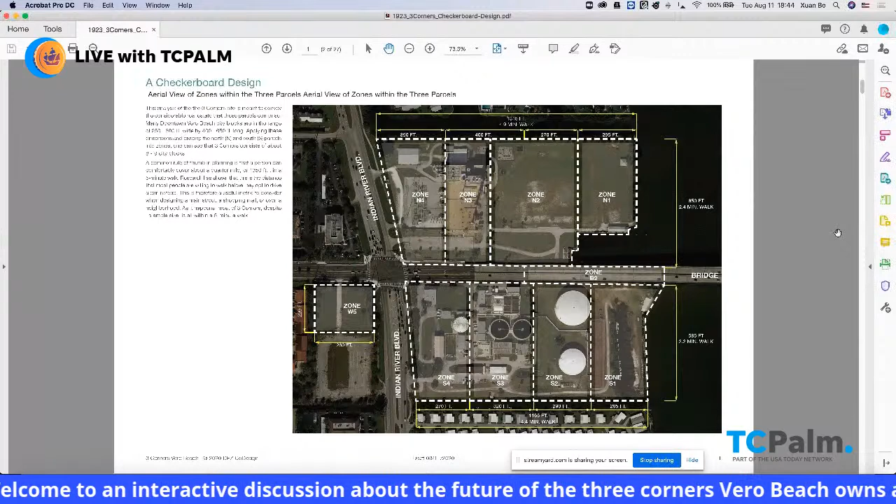But also, this has been seared into people's imagination. The culture will have changed, just like it did in the 1918 pandemic. Many things occurred in 1918, 1920, et cetera, like moving out to the suburbs -- it was the first time we actually moved out to the suburbs. Modernism, modern architecture with its very large glass windows, white color you could clean, and metal furniture without upholstery -- that was the result of the 1918 pandemic, and it's still with us, all this stuff is still with us. So I maintain, and you might disagree, that the changes are permanent, at least for a generation.

And so we have to design a whole new type of park, and we have to do it essentially without public funding. So you'll be seeing two of those plans today. Next -- okay, so this is the site with the existing buildings. You can see the north.

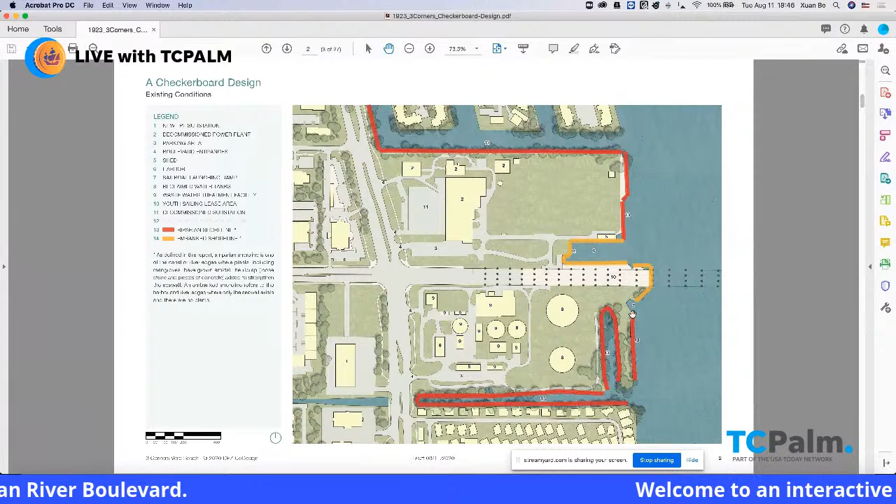Number 2 is the existing power plant, which has one beautiful hall, very tall with a beautiful ceiling, and a lot of utility stuff to the east that could be demolished along with these buildings. There's already a remediated site ready to be built to the east. To the south, in red, are existing mangroves, which we'd want to supplement, the two beautiful clean water tanks, and then stuff that can't be saved and will be gone in 5 years.

At this point here, you can cross underneath the bridge—not earlier, at this point—and there's a harbor, which is really quite interesting.

Now, there are a lot of little details and controversies that I'm not going to speak about today because in a way they've been solved. Everybody agrees where the sailing club is going to be, everybody agrees where the boardwalk is going to be. There's a lot of agreement. That's not what we're talking about.

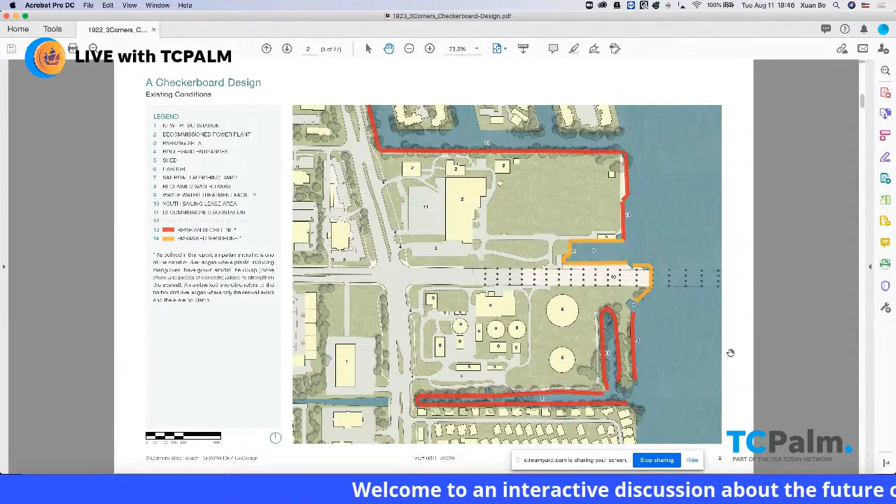Please consider that what we're facing today is 50, 60% agreement. Remember, this is a plan that had 100% agreement. Now we have a plan that, because of the new situation and because I've introduced new elements, probably has 60% agreement. I'm not going to talk about everything we agree about—I'm going to talk about the things that may be controversial, just to get on with your questions.

Okay, next. So this is the plan on which there was agreement. Starting on the east, first of all, over here, just 15, the site across the way—let's just say that's sold for a shopping center or an office building.

By the way, both of those industries, incidentally, are dead. There are going to be no more shopping centers for a long time and no more office buildings. So this has to be something else. Probably the only thing that would fit there in short order would be an apartment building. Office buildings are goners.

Now over here, in the least important part of the site, we put a parking lot. This—we saved the great hall, turbine hall, of the electric power plant, and we put this curved hotel with about 200 rooms on this side.

Although the entrance is over here, because that's the distance we have from the bridge, the hotel lobby is on this side, okay? And there are games here, the fields. Then we have this slight curve that takes you in like this, and we have open sheds that are very popular, and of course we've retained them.

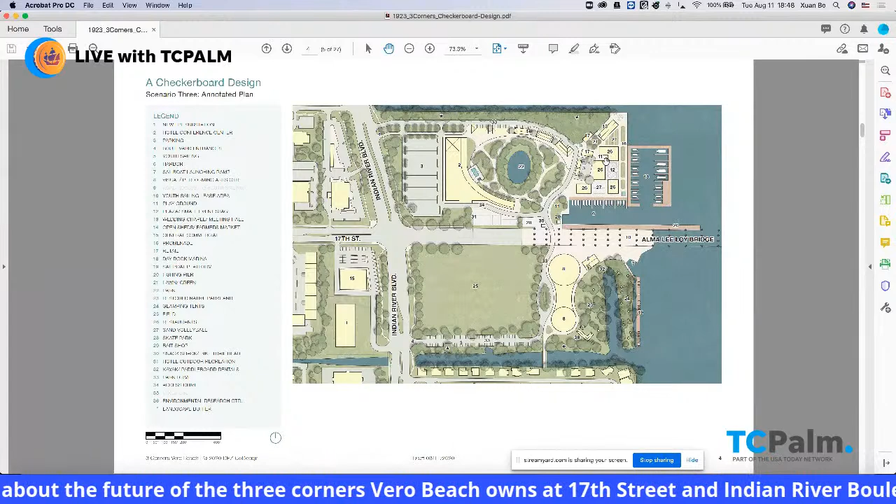And then over here we have a series of restaurants with different price points, usually 2, maybe 3 restaurants with different price points so that people with more or less income are welcome and feel comfortable.

And then we put here a hall, which we call a meeting room, but could also be a wedding chapel that would raise funds. Wedding chapels and so forth raise a lot of funds, but it could also be used for the meeting hall, for City Hall, just for public meetings. This is a nice place to meet.

A harbor for day boaters is built here, and to the south, at this point where there's a launching, is the sailing club. This is this canal, which is beautiful at the moment, could become more beautiful.

And we put some glamping tents on it—tents that you can actually camp in the woodlands. And then the two tanks are preserved, and an awning is put between them as a stage for music.

This we mothballed. This area we decided, and actually people agreed, but I have to say the decision to mothball this site, although made by the council, was proposed by me. We have to remember that was my proposal.

And the reason I made it is that we didn't have any ideas, you know? Insofar as it wasn't a positive thing where you say let us mothball it and have somebody else decide—we can't decide, so therefore let's mothball it. But in any case, it's 5 years before the sewer plant is moved out, okay? So I want to say mothballing is not a positive thing, it's just that we didn't have any ideas.

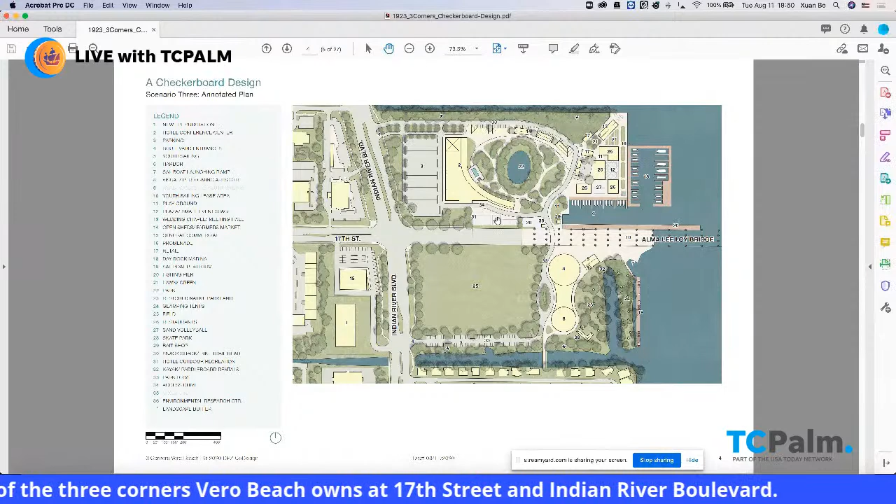Now, since that time, we have had ideas. And I would urge you to think of this as not a mothballing, because now we have ideas, which I'll show you shortly. This plan was the one I showed at the last meeting, and it was this, among others, but I think the whole process received that famous standing ovation.

Okay, so we moved on, and I proposed this to the steering committee. And when it was done and very popular, I said, I really owe you another plan. And so I did this one.

How is this plan different? This plan has a parking lot like before, and it has the conference center, number 2 here as before, and the lobby is on this side, like this.

But instead of a large hotel with an enormous internal walkway - and that large hotel, I'll tell you, I just spoke to a developer this morning, no one's going to be building a hotel for a very, very long time because the hotels are suspect. They're doing very, very badly. I spoke this morning to Stefan Johansson, who knows about such things, and he says forget about the hotel.

Actually, he added one more thing. He says, for that matter, forget about the conference center. But that's because they were thinking about conventional hotels with elevators and hallways and all that kind of thing, and these air-conditioned monsters, which are the conference center.

So when I redesigned this, it was different. This conference center, which is this beautiful thin hall, would be cross-ventilated. So that's an entirely different proposition, and it can be handled. I have lived many times in Florida with cross ventilation with just a little bit of supplement. So this is a different conference center.

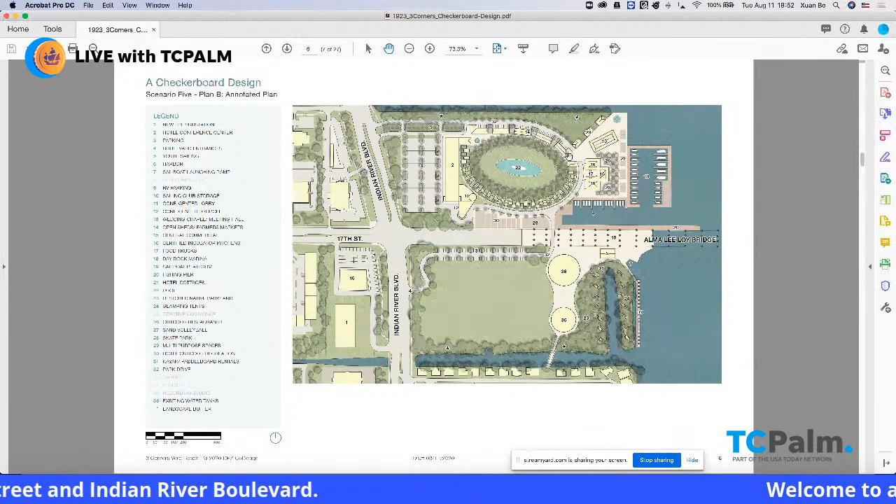Just imagine they're multi-use. They can be used for anything from a cat cafe to selling vegetables, to basically having outdoor classes for the kids and so forth.

But here, instead of an ecological pool, what I did is I put a real swimming pool. There are lots and lots of kids on the west side of Vero that don't have a pool. They don't belong to a country club. It's difficult - they certainly don't have a pool at home, and they certainly don't have much of a chance to get to the beach.

So we said if we really want to make this a place for everyone, let's have an incredibly magnificent pool, huge and fun and surrounded by an open lawn so that people could actually sun themselves and sit very far apart. This is not a tight pool. You can distance yourself within the pool, and there are lots and lots of places to actually sit and sun yourself.

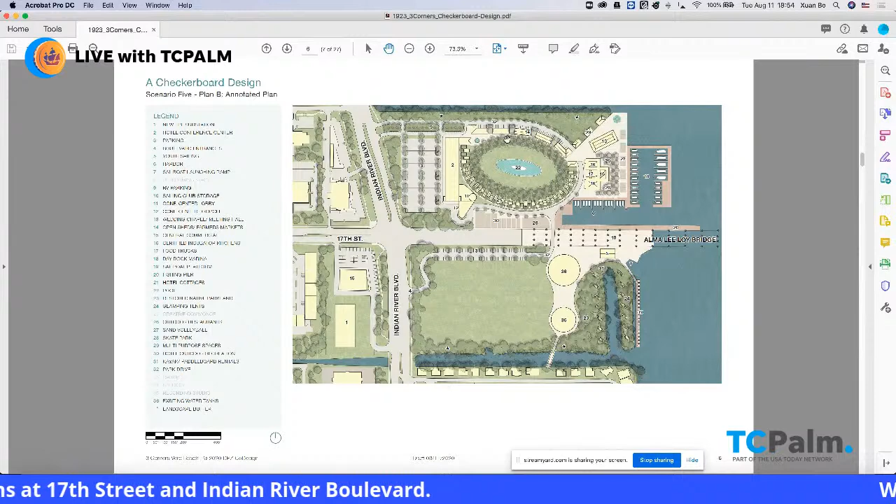And then here you can see this ring of trees, which are palm trees and shade trees. Those are spaced at 20-foot centers, which means you could bring a blanket and spend the day out there with automatic spacing, social distancing, because the trees make you social distance. So that's what you're seeing here, and that's quite an innovation.

Now over here we have the three restaurants. Instead of being air conditioned like the ones downtown, they are actually open air sheds. I wanted to make them less expensive and more variable. So you see how they work here - these are food trucks, fed by food trucks, very inexpensive to build. And as long as you cater and manage the food trucks, you can continually have fantastic food, expensive or less expensive, and it changes every weekend if you wish.

So this is less expensive, and in front, most of the seating is outside. These are trees and palms with 10-foot spacing, which is exactly the spacing for a table with an umbrella.

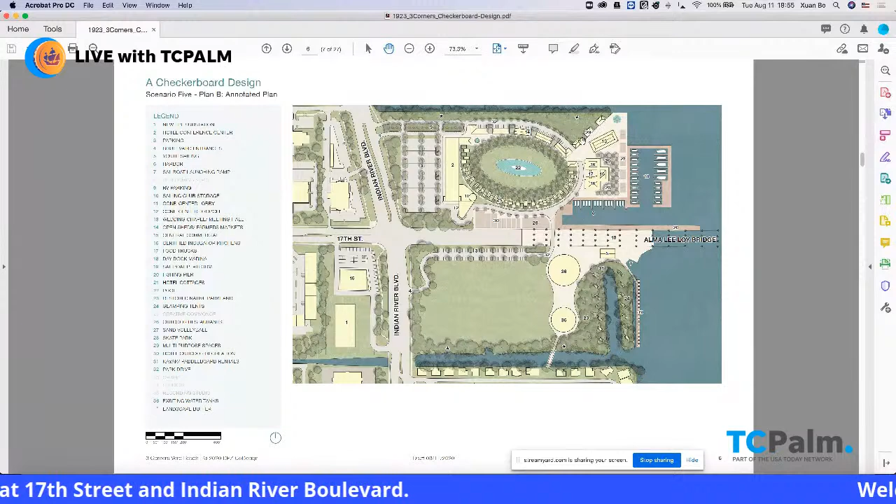And then you have the old meeting hall that was always popular, or chapel, wedding chapel - three air-conditioned spaces here, because you have to administer the chapel. There's reason to have them like little offices, probably administrative for the whole thing. And then these are sand volleyball courts, incredibly popular. And on this side, as you know, we have actually mothballed this side.

Okay, so this was the plan, and this was approved. And then we received a couple of pieces of feedback.

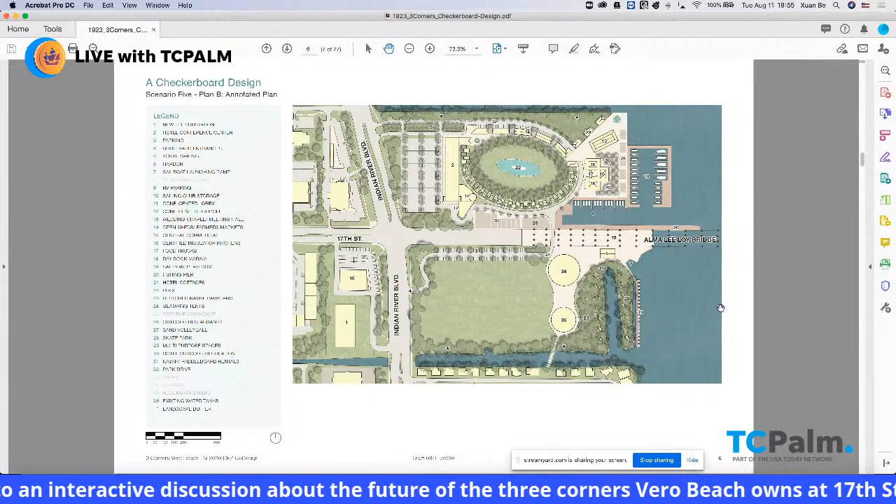Do you have the big hotel? No. Okay, this is, no, there's one which has the big thing here. Wait, there's another one I have to show you, the one that has the arts column. Sorry, we've been doing our best here. Jeez. Unbelievable. Is that the one with the arts column? No, the one with the oval.

Okay, so this is the idea we had over here. We said, okay, let's put the canvas between the two structures. And by the way, these two tanks are beautiful concrete, beautiful tanks. You can actually have galleries inside, you can project art on the outside, and you can have a canvas roof between that makes a wonderful stage.

Okay, so then we made a place where you can listen to music, and this is a 10-foot grid on the grass, like a football field, so you're separated, your little group is separated. And above it, there's also a grid of wires with local speakers, so instead of the band actually blaring out and bothering the neighbors, you have a speaker above you so that it's very loud from where you sit, but not loud anywhere else.

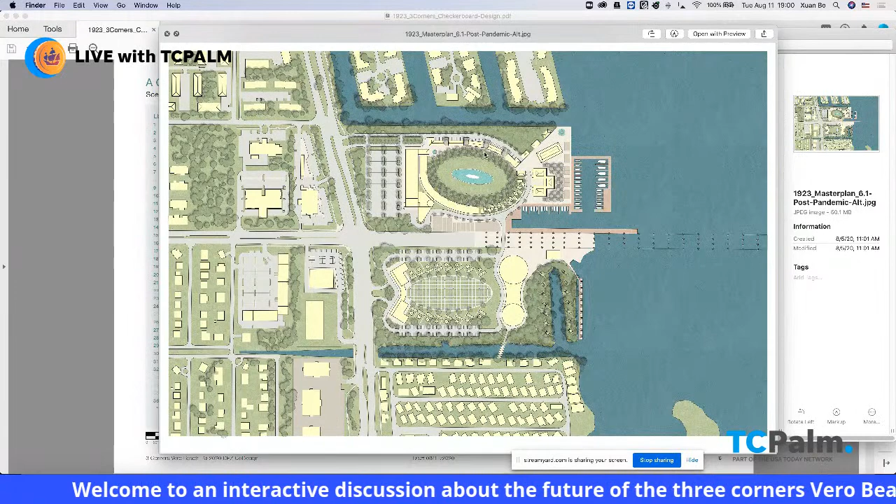Who's going to build the roads? Who's going to build the playing fields? The courts? Who's going to build the pool? Who's going to plant all that landscaping? In my opinion, that's between $5 and $7 million minimum. And I was counting on the 20 million that was actually the income from the sale of the utility when it happened.

I was told, no, times are different. COVID has eviscerated us, and we can't pay for that. And I said, how can you tell me this? How can you tell me? And he said, well, that's the way it is. We need the 21 million in a lockbox too.

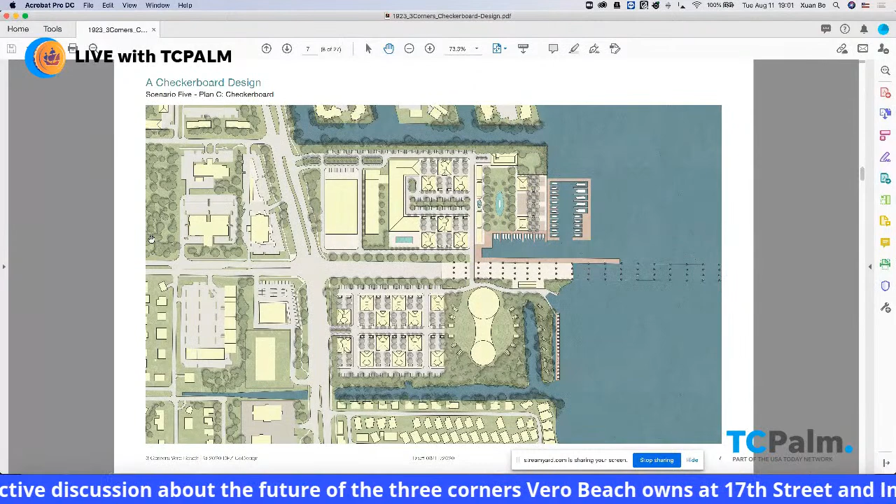So I said, okay, Monte, I will then do a plan that actually carries itself. In the last couple of days, after Monte's conversation, I came up with this plan. Now, this plan works this way, okay? And this creates a lot of income.

There is, of course, the conference center that needs to be renovated. There's a hotel, an inside hotel, a conventional hotel of over 200 rooms, with its own pool.

And over on this side is a facility that will pay $6 million, which is a boat barn. Again, the boat barn is no taller than the existing power plant, nor is it any uglier. In fact, it can be quite nicer.

The boats come out here and they would launch here, right here using this harbor without bothering any of the neighbors on either side. So this is a big hit of income, not only at the beginning, but also ongoing. This can generate a gross of about $1.1 million in a year.

Then we put a kind of small Key West style apartment building here with lots of treed courts. Each of these has 12 apartments that walk up, over here. These over here, all these apartments are 216 apartments. Again, they're walk-up buildings, they're very small, they're the size of houses.

And that will generate, a developer will pay for the right to build those, $6 million. Again, $6 million is plenty enough to get everything built. To get the chapel built, to get the restaurants built, to get the pool built, these are the open pavilions right here, to build this, to build the docks, to build the playing fields, etc.

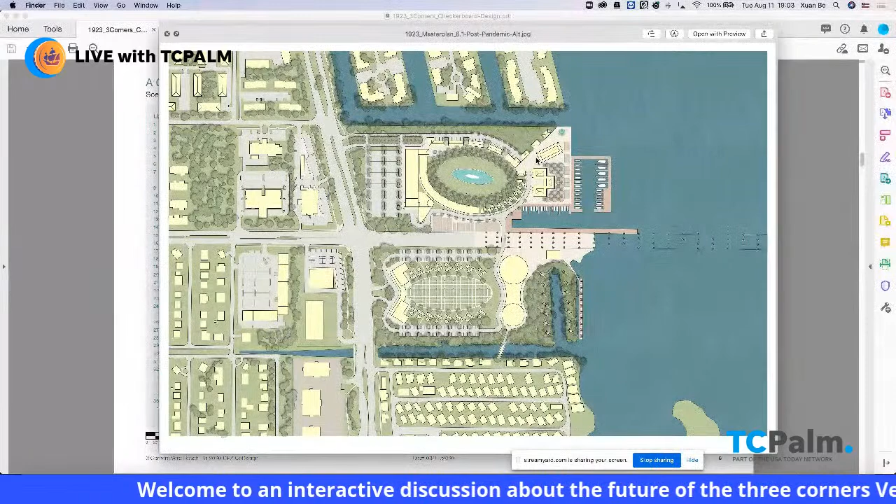The city has to pay $5 to $7 million to get it off the ground. And you can actually kick and complain that somehow, but it ain't gonna happen. So let's just confront the reality.

Now, if you want to have a plan that generates income from day one, it's not going to be the hotel, it's not going to be the conference center. What's going to generate income from day one is the boat barn, which will generate a great deal of income. This will come later when it's revived, when the industry of conference center and hotel is revived.

But these apartments will generate another immediate hit of 6 million and ongoing income, which, if you negotiate properly, will be a continual operating income, a very, very luxurious operating income to keep the arts going and to keep all these facilities highly funded forever.

So I just want to back off and say, I've done my job. You either have money and you subsidize it, or you do this plan. And if you say, well, we don't want apartments, we don't want this, we don't want that, that's fine with me. We can do the other plan, but it's not my fault if this thing doesn't get built. So I know I've laid a very difficult problem in front of you, both politically, but there is a fiscal solution.

By the way, I'm not going to show you renderings. These are all very nice plans. Could you show them, please? I mean, all of them are wonderful.

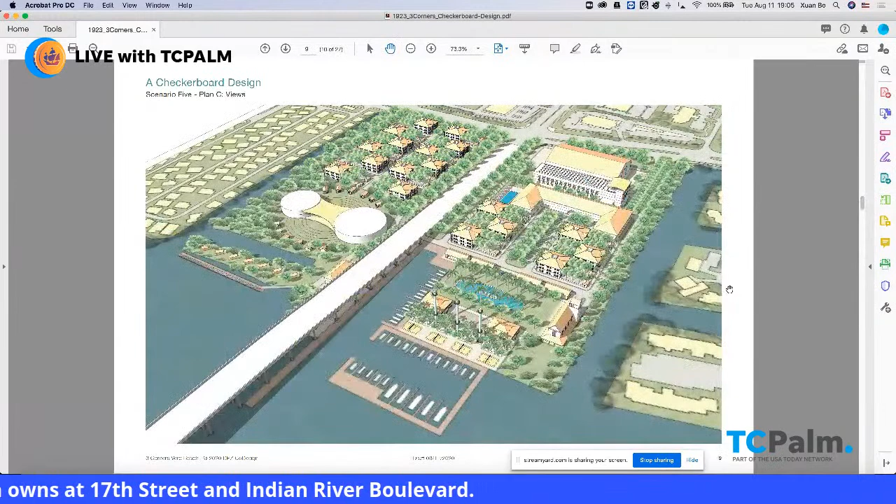So this is the plan, here's the boat barn. As I said, perhaps not expected, but it's not uglier than the power plant. This is the power plant, which is now a beautiful conference hall inside, with a much less expensive tent on top.

That's going to be the rooftop bar. Here's the hotel, 240 rooms or so, with a nice entrance. You come in like that, and you have this magnificent turnaround, like the great hotels of Florida. And then you have apartment buildings here. Each of these is 12 apartments. They're walk-ups, I'll show you what they look like.

And then here are the open markets, very well located. By the way, everything's more compressed now. Theoretically, it could work a lot better.

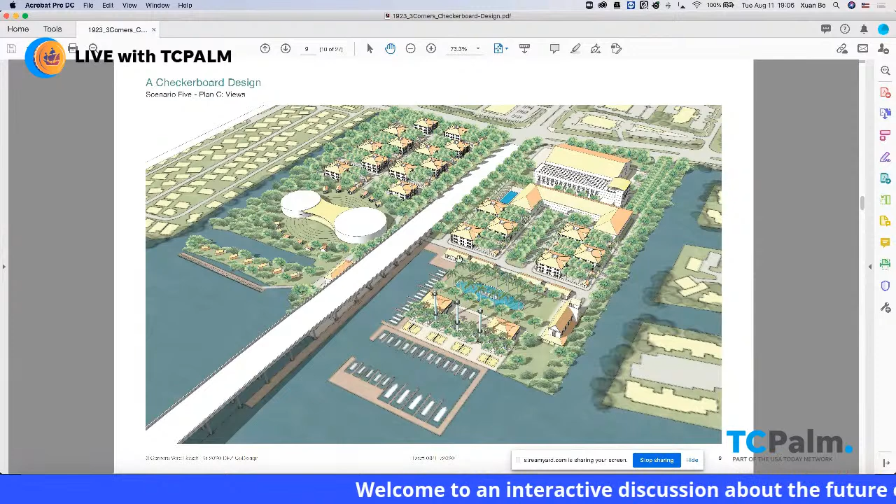Okay, this is the restoration of the mangroves that makes a park-like facility here, a bit of a wilderness. The kids are here now, playing and splashing, with inexpensive food and excitement out of the cabins, out of the market buildings. Then the 2 restaurants, which may in this case be air conditioned if you wish.

And we were asked to preserve the 3 great chimneys that actually from the ocean, and from the approach anywhere, these 3 great chimneys, they're actually very handsome. And so we took them off the top of the building, because actually they don't sit on this building, they sit on the ugly part that we demolished. So we took them down and we kept them as a signal, and they're really beautiful.

And they will actually shine the lights everywhere. They will light the landscaping, they will light the pool, they will light the courts. There's nothing better than distant lighting instead of low lighting. Low lighting destroys your retina. Very tall lighting, high up, is like moonlight. You can see everything, but it's very gentle.

And here's... Bo has to put in much more trees here. This is a wooded forest. By the way, we did this today.

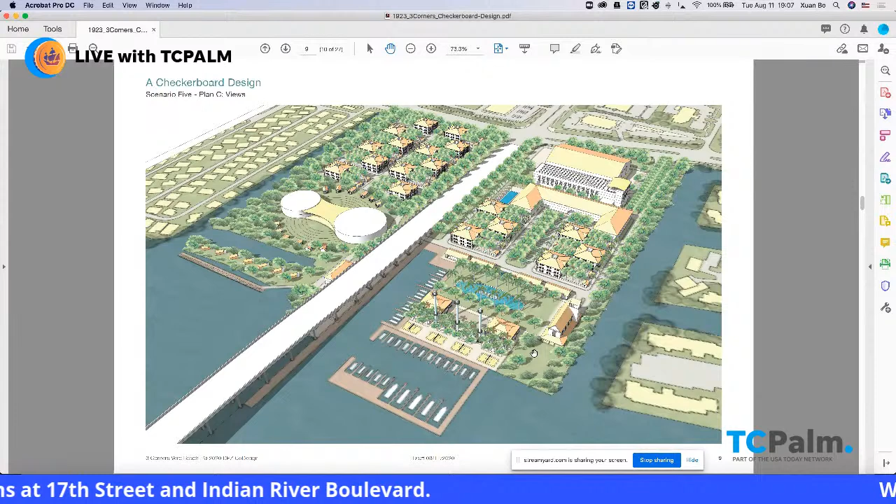And over here, you can see the canvas stretched between the 2 tanks. And these tanks are fantastic because they're inside art galleries, and outside you can project inside. This stretched canvas is a stage that actually will play music to both sides. And then you have these little apartment buildings with their forecourts. Okay, and the glamping here on the canal.

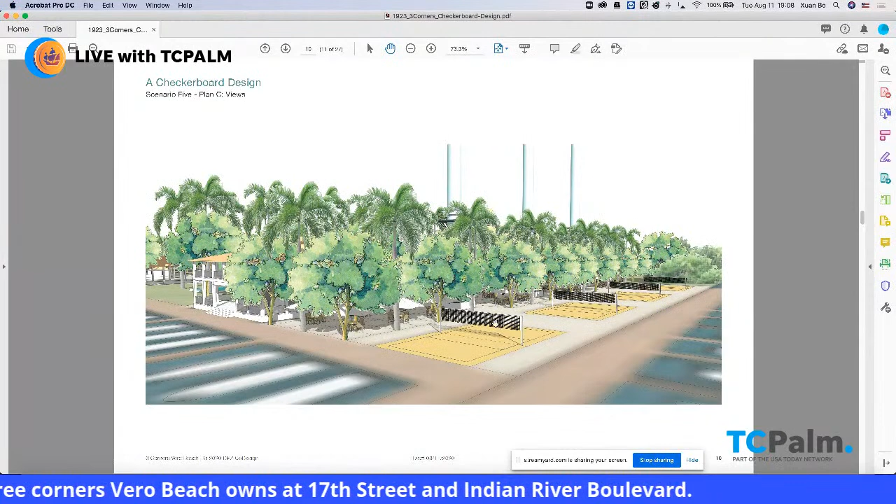Show me more, this is from the ground. These are the courts, the sand volleyball courts. And you can see here the 10-foot grid of shade trees, palms, that actually automatically spaces people. And here you see the restaurants behind it. And this is the beginning, we haven't yet done it, but these are the 3 chimneys.

Next, and here it is, here's the pool, which would be absolutely delightful. And again, a huge pool with very much children in mind. Okay, this isn't for swimmers, this is for the kids of Vero to have a great time.

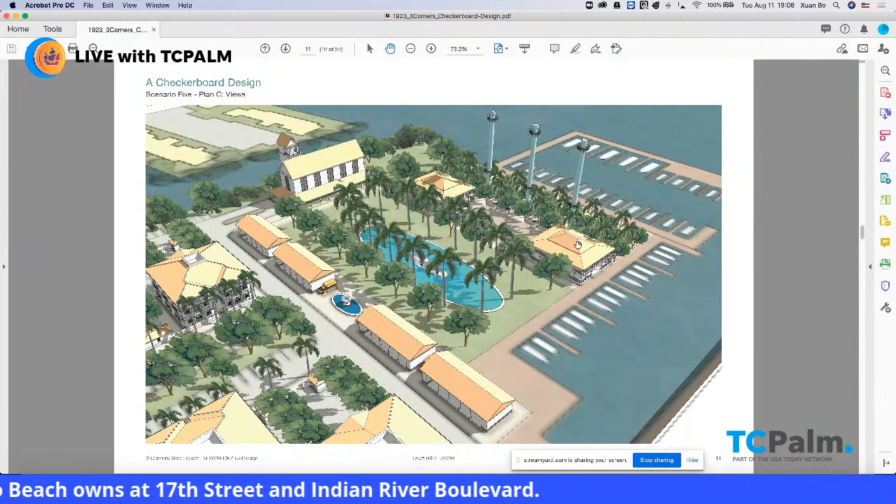You can see the restaurants are just like we drew in the original. And by the way, there are 2 stories. One of the commissioners, Commissioner Moss, said, 'Can we go high to get a view? Can we get it high?' And we said, yep, so we made the restaurants 2 stories. So below, and by the way, they can be air conditioned or not to the extent that you wish.

This is the meeting hall wedding chapel. As I said, these are the open pavilions. And then you see the apartment buildings, that are just the kind of things that you build in Key West down here. Next, oh, and by the way, there are food trucks everywhere if you wish.

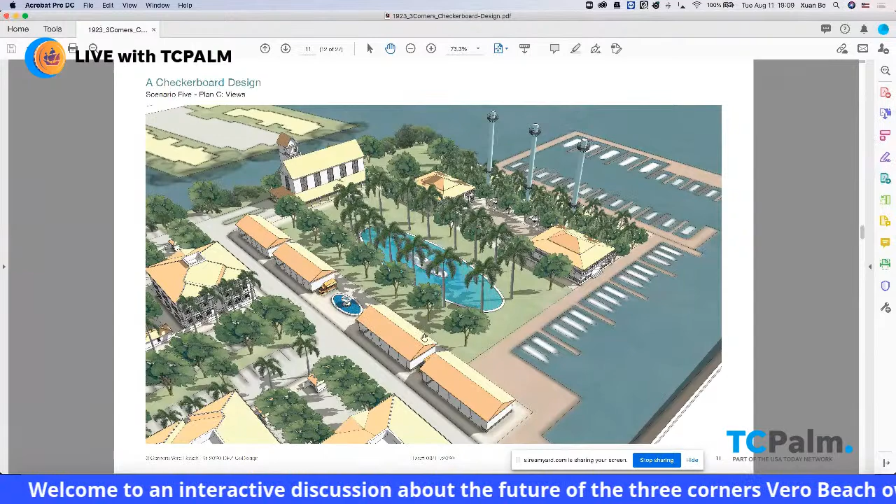The food trucks can actually be hidden, so they're not ugly, but you can actually find inexpensive food everywhere.

Next, and so these are the apartment buildings. You can see that they're full of balconies like that. You can see it's very treed. By the way, I like the way that the spaces are tighter. This is the hotel in the back.

Somebody asked to have solar panels on top to run it. Perfect, we put those in. And beyond that, you see, I see this being very highly compatible.

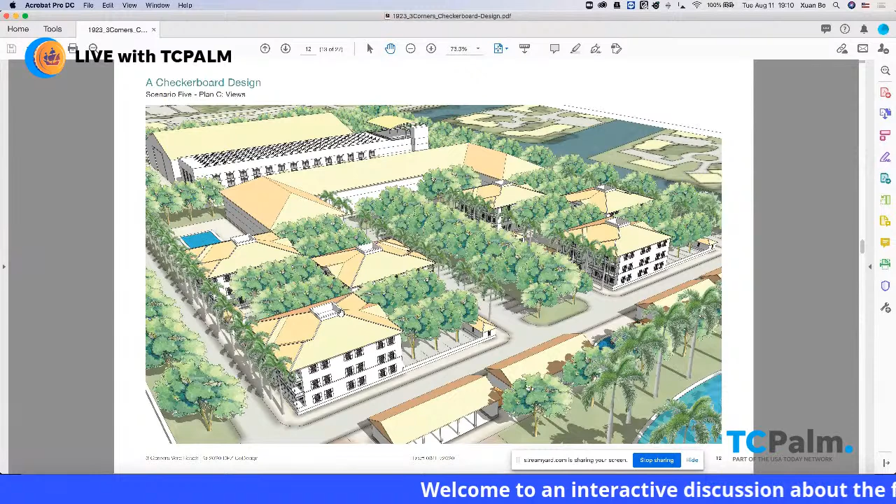I very much like the idea of people living here. So instead of it being a park that dies at night, I would love to see a kind of a park that is surrounded not by wealthy people. These are rental apartments, okay, probably belonging to the city, or anyway, you can control the rent if you wish, but actually a place where people live night and day and enjoy it night and day and keep it safe.

So these are the little apartment buildings. This is what they look like from the sea. I want to take your fear away. Oh, apartment buildings—yeah, there are horrible apartment buildings, but these are not horrible apartment buildings. These are the kinds of things that are beloved in Florida.

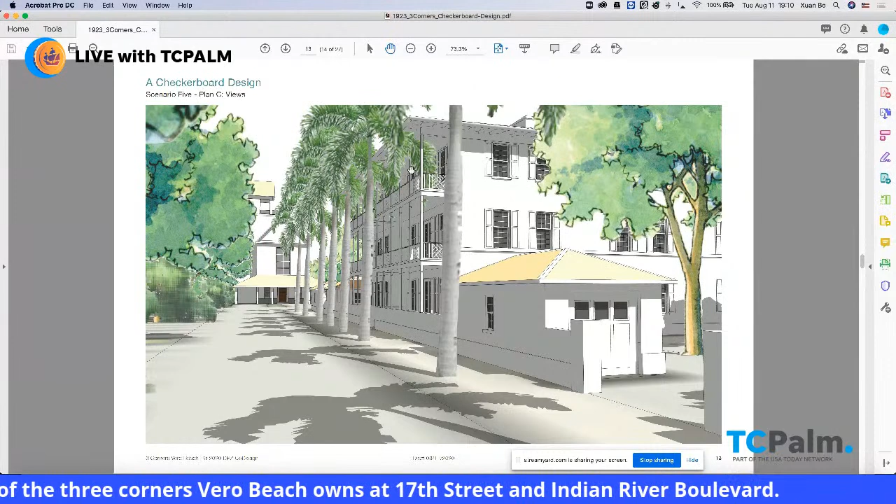They're not expensive to build. The parking is hidden—this is the parking court here. You can see the road that approaches the meeting hall. The place is assembled as quite a nice village.

Windsor. This is the meeting hall, where people can dance—the senior center can dance here in greater dignity than in that old facility of yours. You can actually have public meetings in a beautiful hall instead of the horrible room where you all meet to make decisions. This is the restaurant.

You see the architecture is very compatible, but very rich—it's both harmonious and has a lot of building types: hotels, apartment buildings, restaurants, small cottages, all these things occur.

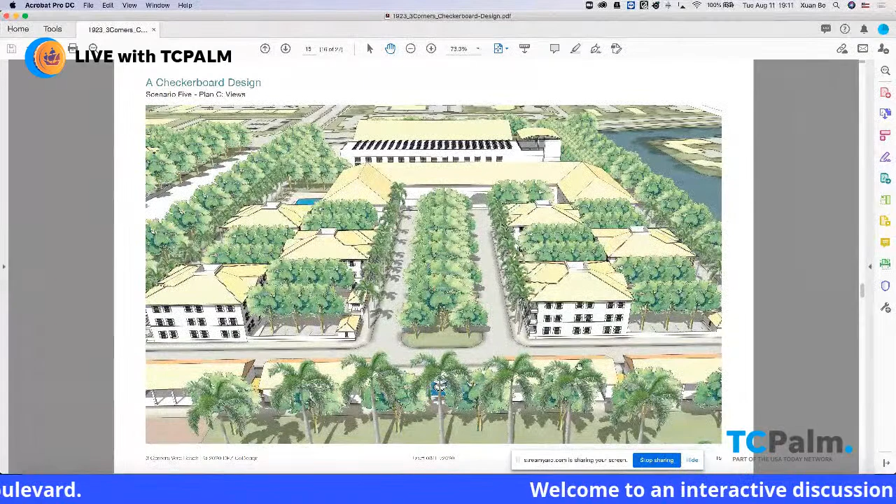Most of them pay for themselves. You can see how the parking lots are actually the occasion—these are graveled parking, small graveled parking courts—really the occasion to have more and more trees. They're not the Walmart parking lots at all.

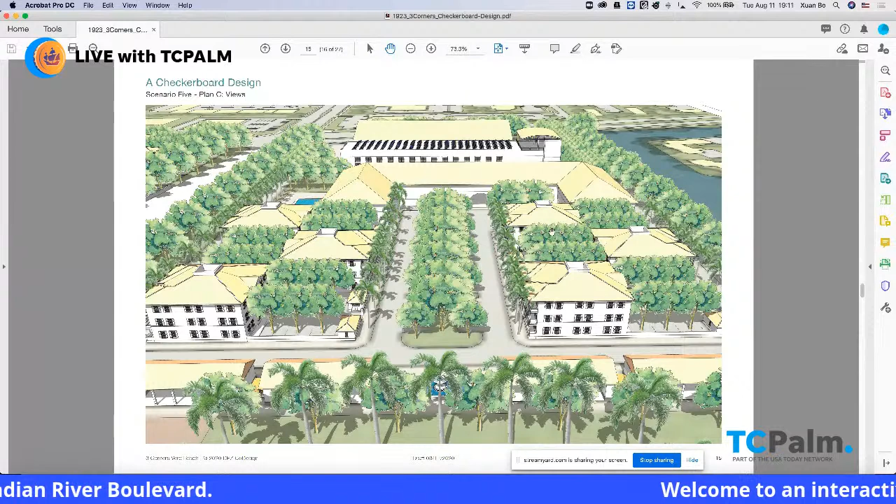Look at the hotel with its forecourt, the approach—uniquely elegant. By any Florida standards, it's not your grandmother's Hampton Inn, okay? And below it, not so good looking—inside it's beautiful, but the conference center on the outside is what it is. It's an industrial building, and at least it's hidden; it can't be seen anywhere.

This is the other side, the entrance, and you can see the forecourts and the apartments. Really what you see on any one street is just two apartments—not a row of apartments. It's trees and small apartment, tree, small apartment.

And then here is basically the hall. Here you see the little houses in the back for the artists, and beyond there's the sailing club, and then the glamping beyond. It's full of trees, full of small spaces.

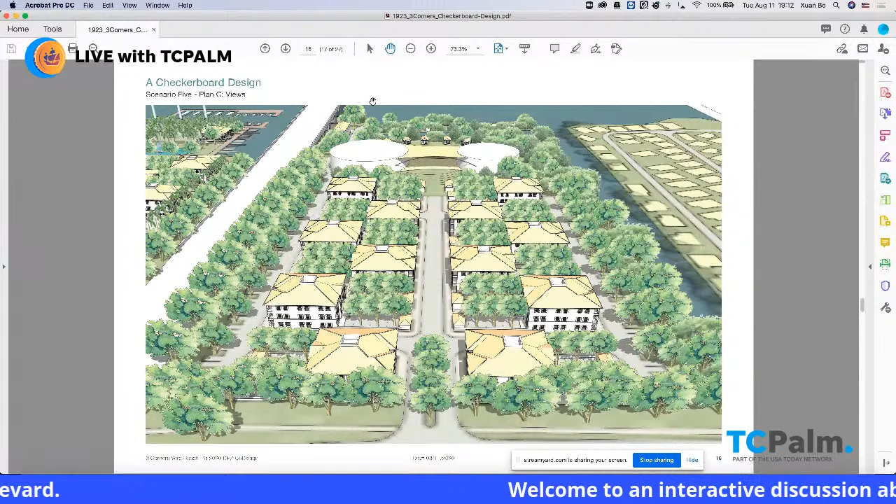Just a little bit more on these apartment buildings, because I know they'll be controversial. They're the sizes of houses. This is what they look like—you see they're staggered, so you don't see a big building at all. Every apartment is a corner apartment.

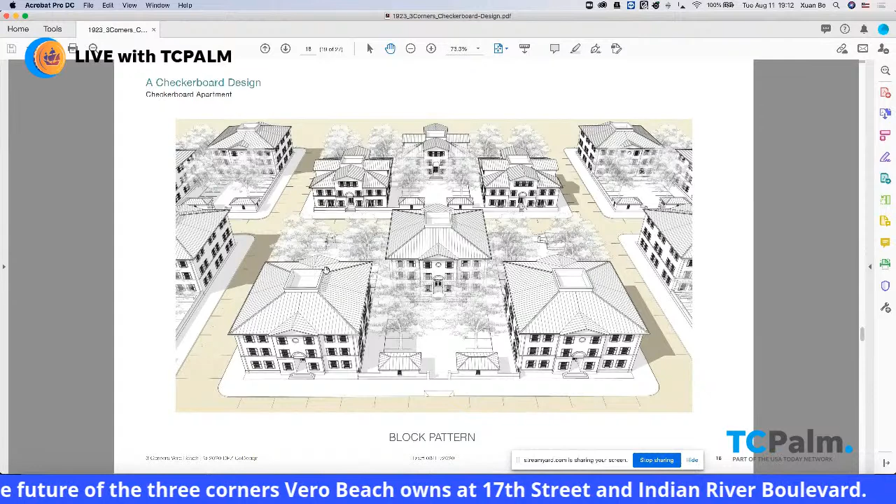And again, they're walk-ups—they don't even have an elevator, so don't worry about old people living here, okay? This is for the next generation. And then of course the trees. The parking is blocked with the first two; there's two garages in front that actually block it.

I want to show you the apartments. The apartments are completely corner, beautiful loft apartments, 10-foot ceilings, with 2 bedrooms, or 3 bedrooms.

Inexpensive to build, and this is the streetscape. There's nothing fearsome about the street. In fact, I'll tell you something—they're probably the best-looking buildings in Vero, on both sides of the river.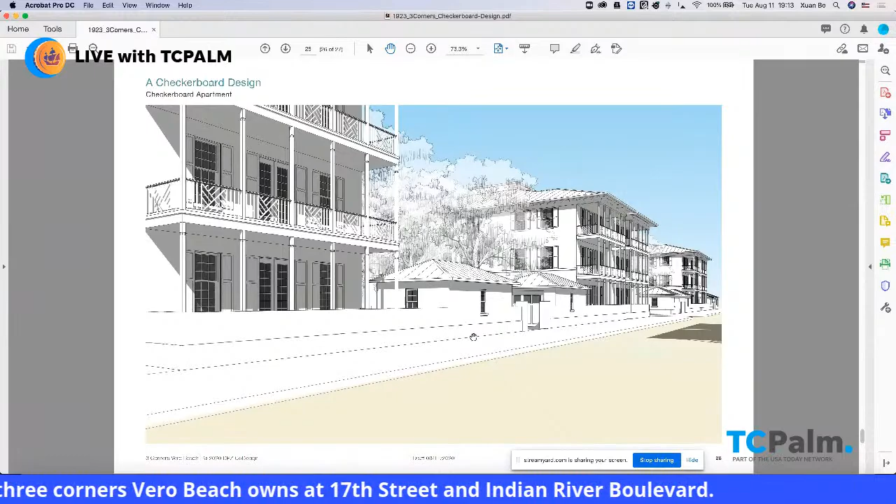Is that it? Okay, but what about the earlier one? Don't you have renderings of the prior one? Yes, you do. I'm going to show the ones of this one. Show me renderings, okay. We have renderings of the other one as well. We have renderings of this that I want to show you. You haven't shown it yet, have you? No, okay.

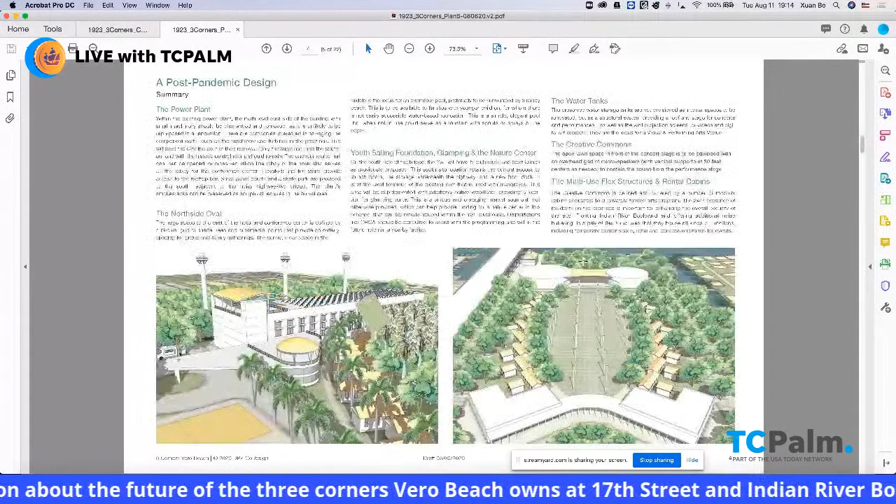Okay, we're going back to the second plan—the one that does not pay for itself, that I'm sure everybody will love, except for the small detail that it might not get built. I'm sorry to be blunt, but I think I owe you a reality check. Okay, no, show me that red one.

So this is how that plan works, okay? In red: the parking lot, the conference center, and the hotel, and perhaps even the playing fields and the wedding chapel can be built by the hotel developer. In other words, the hotel developer will build a hotel and won't give anything to the city, but they will renovate this and build that, and build the conference center. But there's not enough to build the infrastructure.

On the other side are elements that are donated. The sailing club is donated along with its dock, and we will raise funds for the arts village, which is in blue.

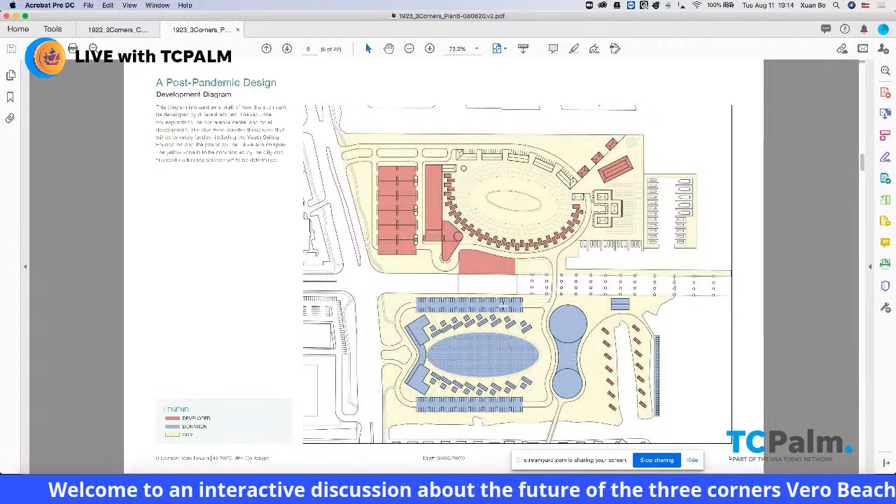But all the rest that is in yellow does not really make income, and no one is paying for it unless the city does it. And that's the problem.

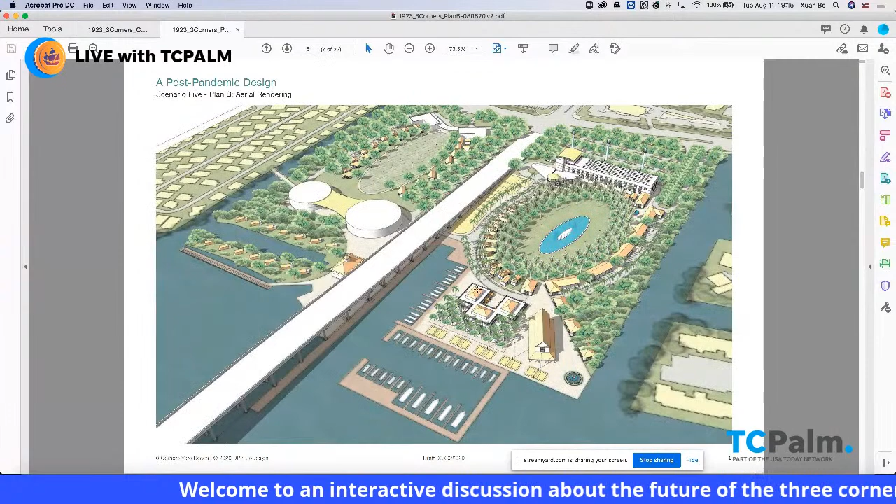So this is the rendering of what I consider would be the popular one: the great restoration of the mangroves on this side, the beautiful meeting hall, fountain at the tip, the three restaurants which are basically open with very minimal kitchens mainly fed by food trucks, the completely delightful and unusual hotel which is cottages, the lobby for the hotel, and the roof bar which everybody looks forward to.

And then on the other side, the glamping here. Look up glamping, it's elegant camping. The two structures holding up the canvas tent, the place which is gridded for the small speakers. They have this in Chicago if you want to experience it. And then the little cottages for the visiting artists next, which are all on scholarship.

And this is what the sand volleyball looks like, including the automatically spaced seating, which is spaced because of the trees.

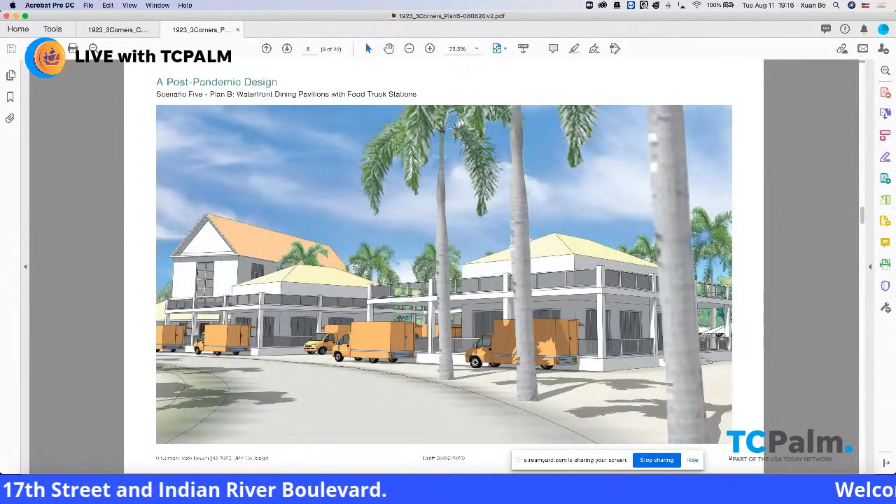This is a bit too many, but it shows you how the food trucks would work. I've actually already eliminated 4, but let's say 5 food trucks at a time, and you could curate them to have continually interesting food at different price points. Something that a kid can go to, and somebody with very good taste can find exactly the right, let's say, Jamaican food, and the kids can find hot dogs. That's the advantage of food trucks.

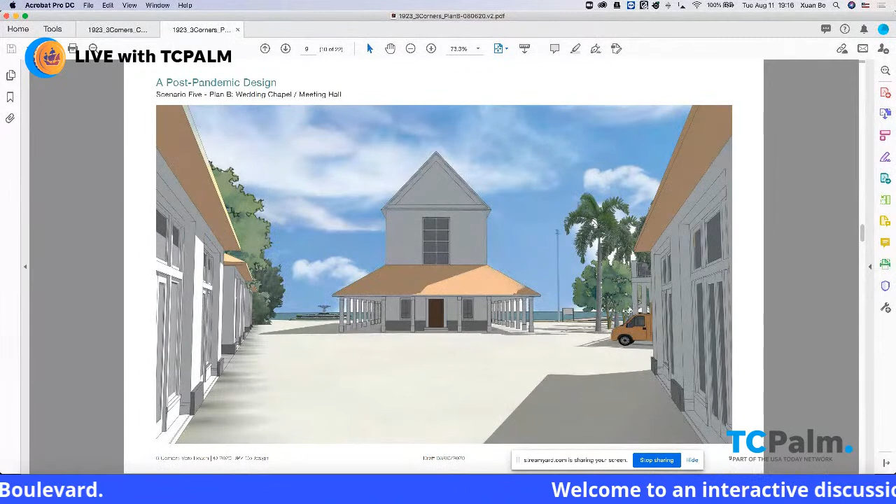Somebody said, what happens with all the outdoor seating? What happens if it rains? Well, they come into these big porches for the rain. There's 3 big porches here. And then also there's the porch, huge porch underneath the wedding chapel. By the way, this is in our new towns that we've designed, like Seaside, Rosemary, and Windsor, people get married in these, and there's quite an income from these wedding chapels.

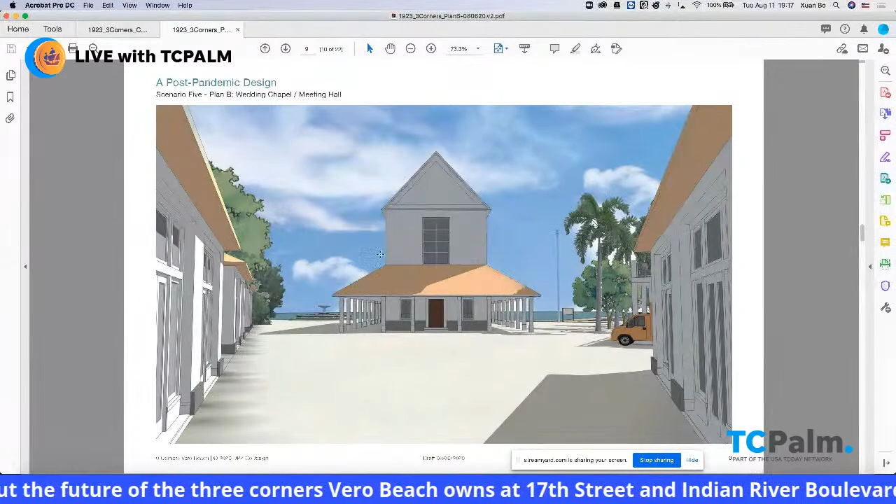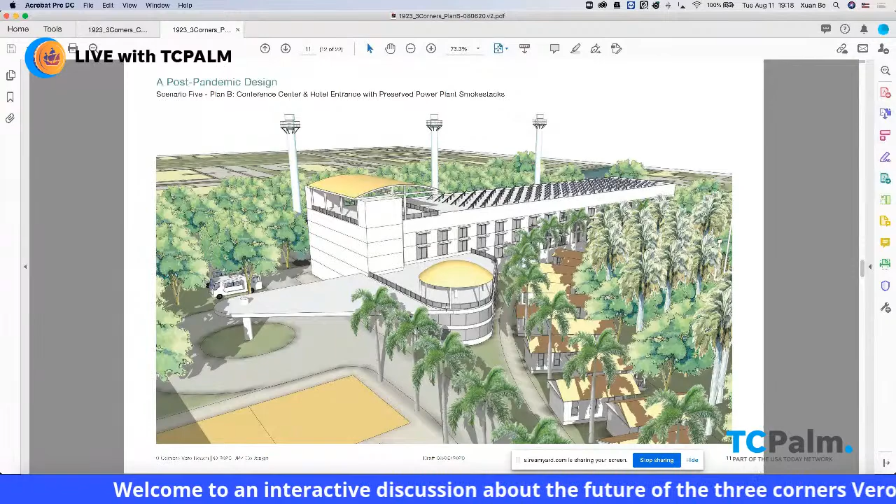And here you can see the incredibly strong spatial quality. There's really nothing like it anywhere. This kind of shady planting, which is for social spacing, both here and there and across the way. And then the mangrove restoration that you see on this side.

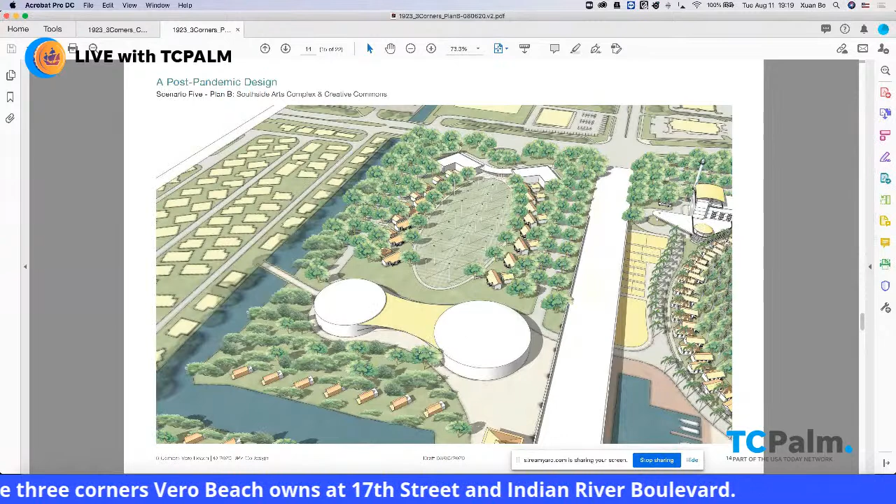Another view. And this is my favorite at the moment, which is the Arts Village. You see there's these little posts, with wires on top with little speakers right above your head, so the neighbors don't need to worry - they're actually not louder than a radio, any of these. And this is the stage area. This is an incredible visual, musical, and theater arts potential here. And already the buildings are up.

This is what they look like - these are the little cottages, very Florida, little 2-bedroom cottages for the artists. And these are the speakers and lights. This is the glamping, the fantastic elegant camping.

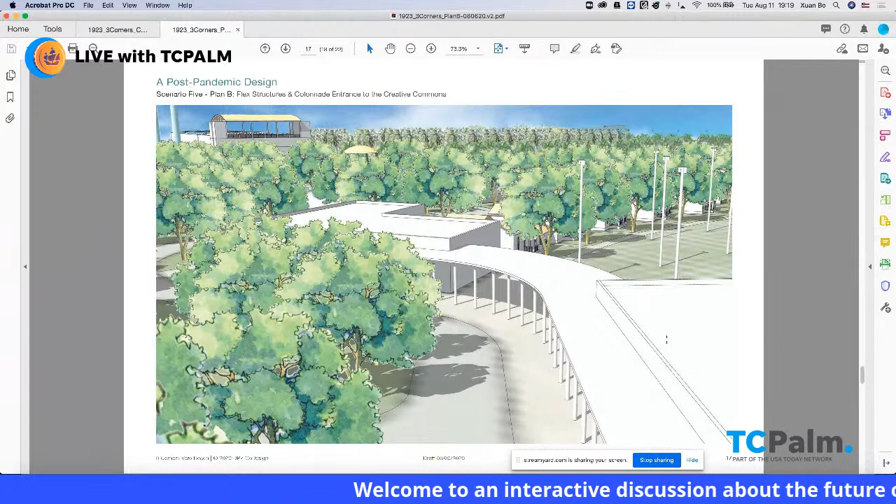And then a serious kind of building at the entrance for recording studios, black box theater, etc., but always very inexpensive, built like a shopping center. No pretension, just something for the young people and for incubating the arts. Across the way, you see the rooftop bar.

So this is looking east. Here's the serious buildings. By the way, you see how every artist cottage has a specialized room in the back—specialized as a writer with a library, specialized for piano, specialized as a studio. In the end, each back building would be a different size.

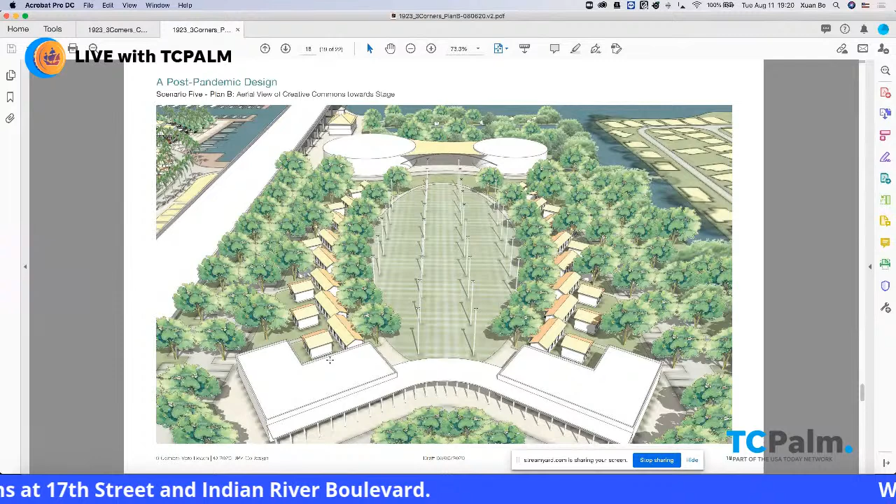Imagine the artist coming down, and you don't have to pay them to come. Just say, hey, we offer you a cottage and a studio in beautiful weather. Who would turn that down? We have this program at Seaside, the new town we designed, and it's very successful—no one turns us down. The musicians of the Birmingham Symphony are happy to come down and play every night. It's the best way to enliven a public space like this.

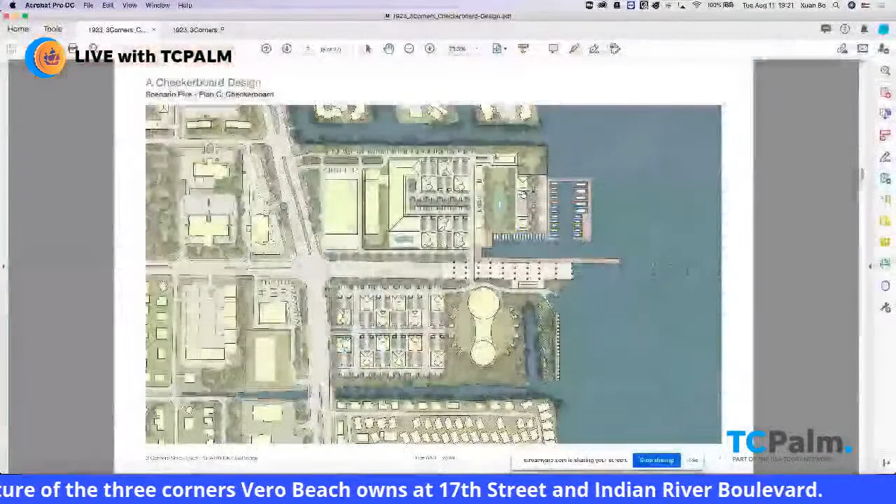That's a skate park, and by the way, I'm fascinated—I don't like putting the skate park away from people. If I went to these restaurants, I would sit to watch the kids in the skate park. I think they're absolute geniuses. I've always wanted to introduce a skate park in between restaurants, finally able to do it. And I love watching sand volleyball at night—they play till midnight, it's a very popular sport even in the heat of summer, they come at night and play. And then, of course, here's the sailing club on this side with its launching pad and dock.

Okay, and then how about a question about the residences, particularly on the north side, possibly even the south side—could they also be Airbnb, short-term rentals associated with the hotel instead of permanent residences? That could be, and of course that's much more populist, isn't it? That allows every resident of Vero to have a chance to live here. That would be my preference. Perhaps not for all of them, but I do think the opportunity to live in a place like this—particularly if you're a lost soul in suburbia, tired of that faceless suburbia—here you can actually socialize and have a nightlife, for God's sake, a nightlife.

Yeah, I think I like the idea of Airbnb. Okay.

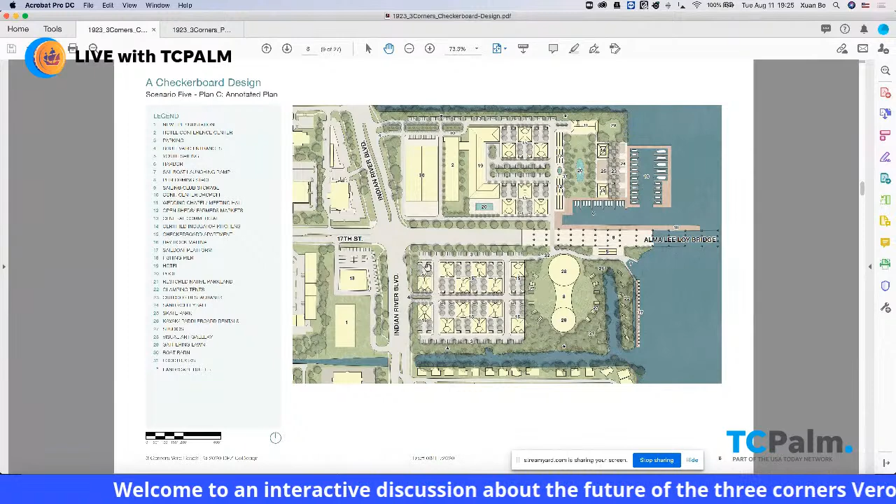It's only in festivals that you would actually completely overdo it. You can handle this with a jitney, like a small parking garage on this side could be handled by a jitney. But that's my preliminary thinking. I would really hate to give over too much to parking, because this scheme is so cool. Of course, the apartments are self-parked, and there is some parking here, probably not enough.

Anyway, this is a moving target. As I said, this boat barn, when I saw the $6 million check, I put it in at 2 o'clock without thinking too much about the parking.

Do you still prefer the other plan, some of the first plans that you designed, or is this more of a financially viable plan?

I go back to the one with the arts festival. I think that plan is probably the most advanced plan in the world at the moment. It's really the first post-COVID design, taking advantage of everything we've been alerted to. When I started designing this, I said being outdoors, being spaced, being under trees, separating the hotel rooms—this is not torture, this is the way Florida was meant to be. It alerted me to the beautiful weather we have uniquely.

Don't try this in New York, don't try this in Atlanta, it's too cold—only Florida can do this. I ended up just loving what this implied. However, it is short on vitality. There's nothing like having apartments, a little bit of a city, like the European waterfront harbors—Saint-Tropez and so forth—where people also live. I don't know to what extent we can hybrid it, but I think this is an absolutely lovely plan.

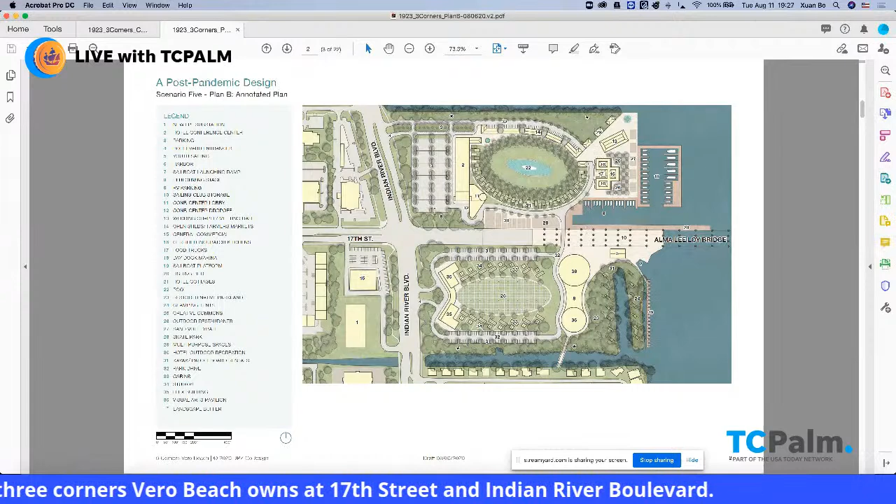But I was told in no uncertain terms that there isn't money for this, that the city does not have the $7 million to build the infrastructure for it. I don't know whether it's going to be political will or whether somebody's going to write a check, but the realistic plan is the other one.

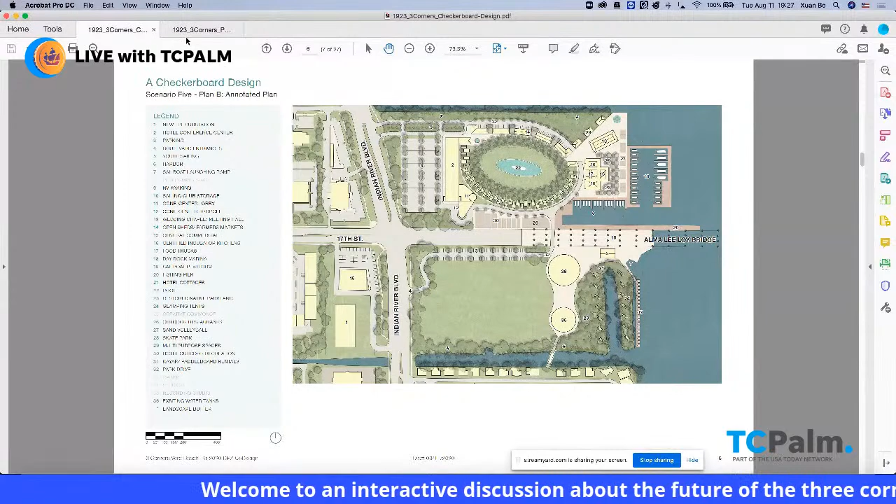I usually don't make comments on air like this, but it seems to me that if the community wanted to fund some of those improvements privately—this community is known for saving McKee Botanical Garden, spending a lot of money on that and other facilities, there's a land trust out there that's spent a lot of money—so when Monty's looking for funding, there may be a private way to create some of those plans on the north side. We designed Windsor up there on the beach side, there are houses that are $7 million—this is an incredibly wealthy community. I think what happens is the plan has to be incredibly compelling, somebody has to fall in love with it, and then, yes, we might be able to raise funds.

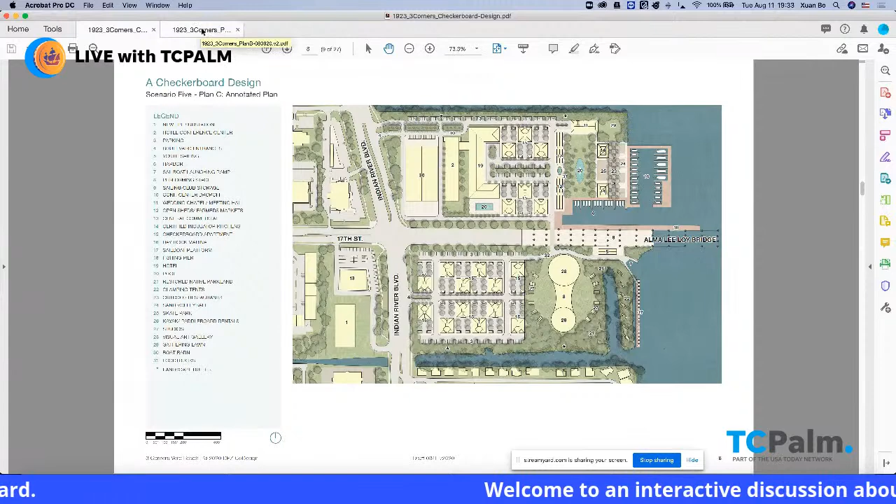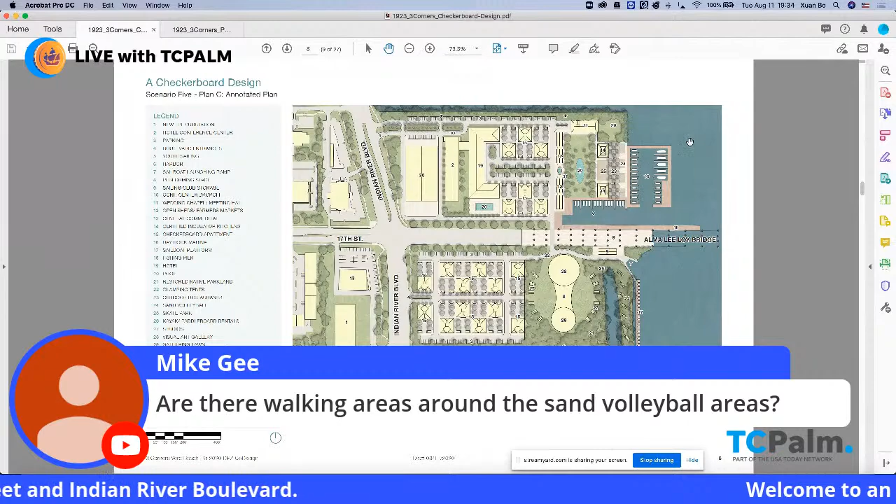Here we've got a question. That's a good question there about the volleyball. Mike Gee asked a question for Andres. Are there walking areas around the sand volleyball areas? And my question on top of that would be, is there a walking path along the water all the way around the property? Okay, so there is a wood plank walk.

Could you get in there a little bit? It's a little small, but there's pavement. Okay, let's see, where are we? Okay, in white is pavement. And then there's a wooden walkway, do you see it? This is a boardwalk, the kind of thing that's very marine, and it goes out to the fishing pier. So that's wooden, timber, lumber.

And then around the base, around these sand courts, these are indentations filled with sand, because the tables need real pavement or they tip. Since this is principally about tables, we needed to pave it. But the 29 here is naturalistic - native species, like a natural park. This one is much more like a place where you sit or lie sunning yourself. But the whole thing is one big pool deck, as it were. And I have to say it really is for little children, who actually didn't show up at the charrette.

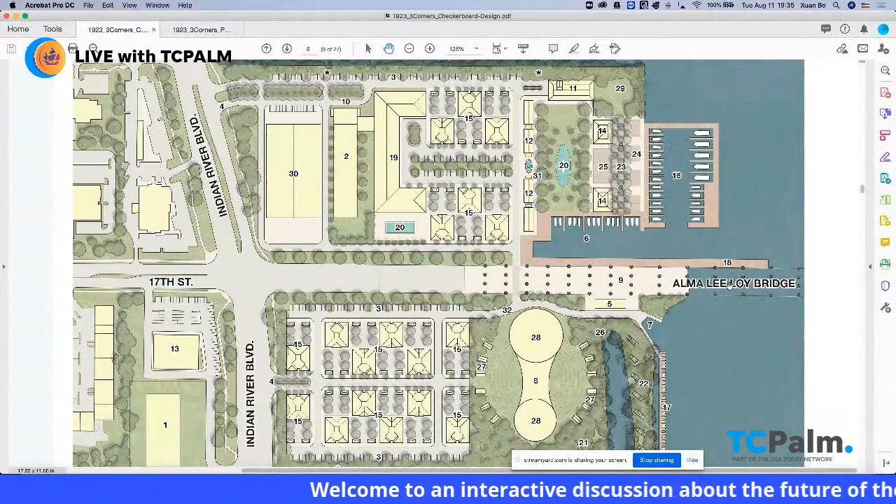But it has been mentioned, what are the kids in town going to do? This is what they like to do, especially on hot days. And at night, when the adults are there, it's beautiful - a beautiful, huge pool, beautifully lit, with sprays at night, making a sound.

When you talk about that pool, between the trees and the pool, what would be there - grass, sand? Hold your ears - the only thing that works is AstroTurf. I thought you might say that.

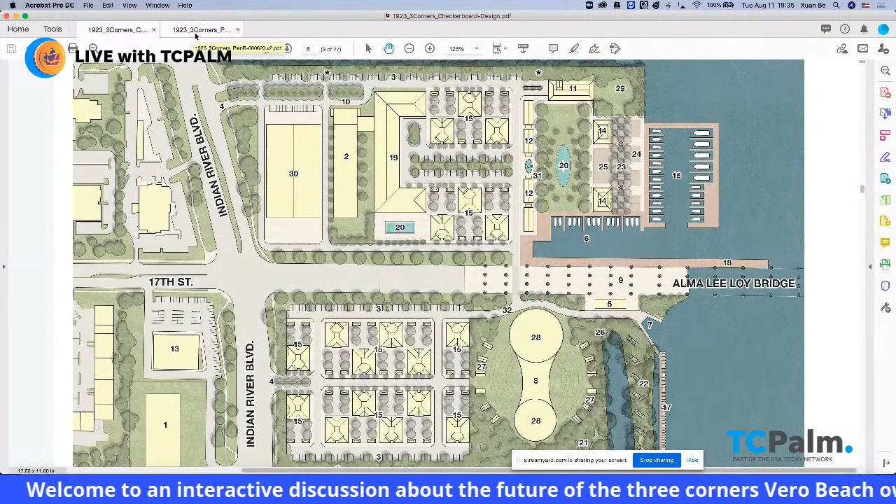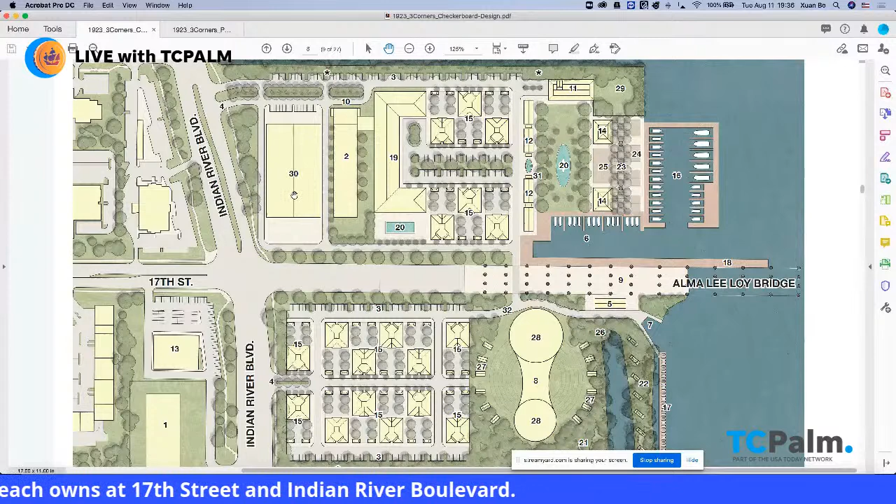We've got a question from a reader: what is that huge building at the front of the sewer plant? Which one, this one at the front, number 30? The sewer plant is here. I'm not sure what that question means - this number 30 is the boat barn, not an apartment building. That's the cash cow, there's no building there. This is the immediate check that comes in and allows you to build all the infrastructure and renovate everything - it just gets you going almost immediately.

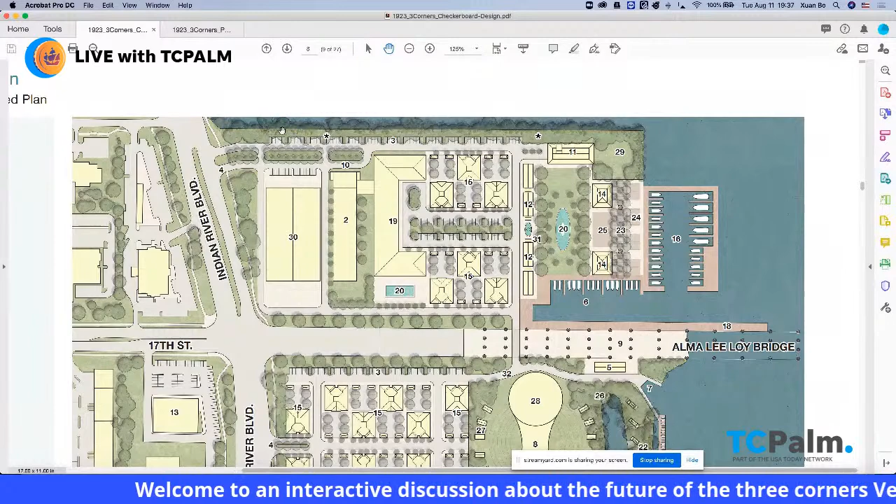I've got one more follow-up question about the mangroves at the very top of the image. It sounds like you're going to put more mangroves in there - is there a walking trail anywhere up on the perimeter of the property? I don't think so, up there. And furthermore, I don't think the neighbors to the north, whose backyards are directly across, want to be overlooked. They'd say, I've got my backyard out here, I'm grilling hot dogs in my underwear, and I certainly don't want anybody looking at me. So the answer is clearly no, out of respect - they're accustomed to having nobody look at them in their backyards across that canal. That's why we did the dense mangrove for them.

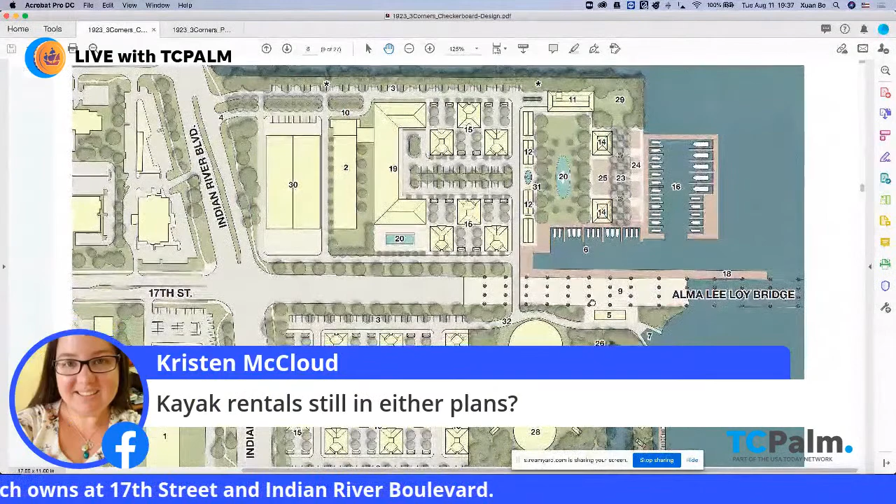We've got a question from Kristen: are kayak rentals still in the plans? Kayak rental, paddle boards, those kinds of things? I think so - exactly under the 26, administered from the sailing club, that would be full of kayaks and other dangerous apparatus.

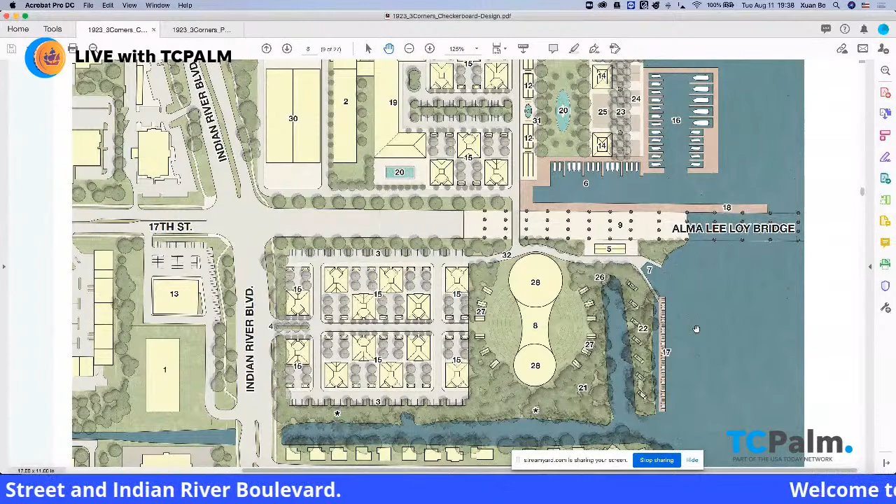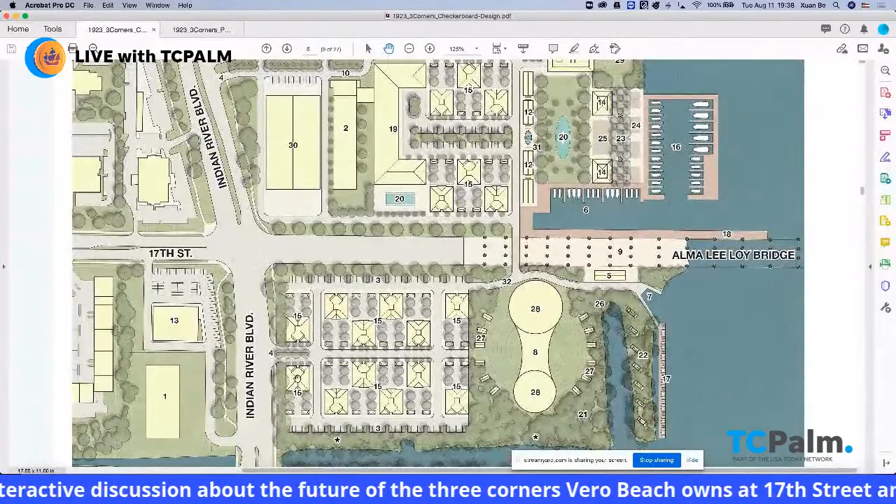One of the comments from Beth Powell - she suggested some kind of walking trail that connected to the Lagoon Greenway. That's more of a comment than a question. Yeah, there is a walking trail here on the east - you see we kept it continuous, to be some kind of bike trail. There's nothing continuous now. Well, you can generally stay on the waterfront here, but I think it's better at this point to go inside sometimes. By the way, some of the walking trail is underneath the arcade of the chapel - it's not this continuous, similar experience. There are different things that you can do as you go along.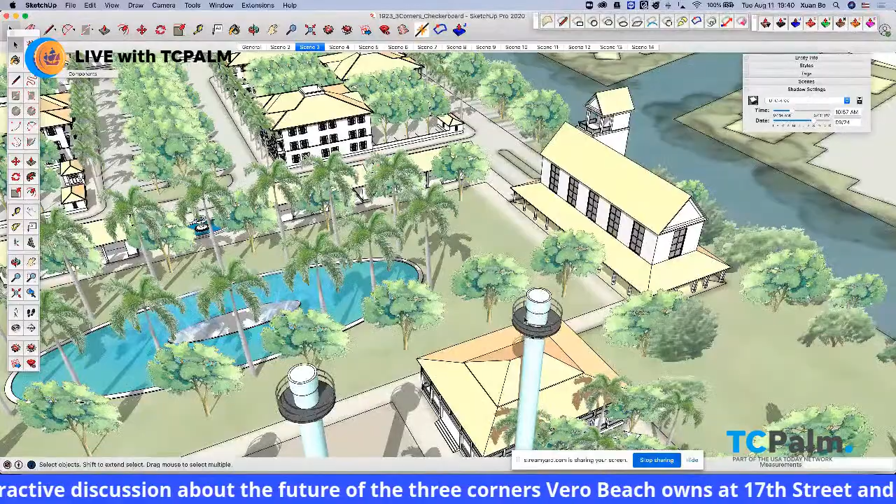I do listen to input, and one of the things that stunned me is they said we don't want to lose the 3 chimneys that are on the power plant. They orient us, the boaters know where it is, and it's also visible from the approach on the street. Although they no longer make sense on top of the building, because that's not where they are anymore, they're on the part we demolished. We put them in front.

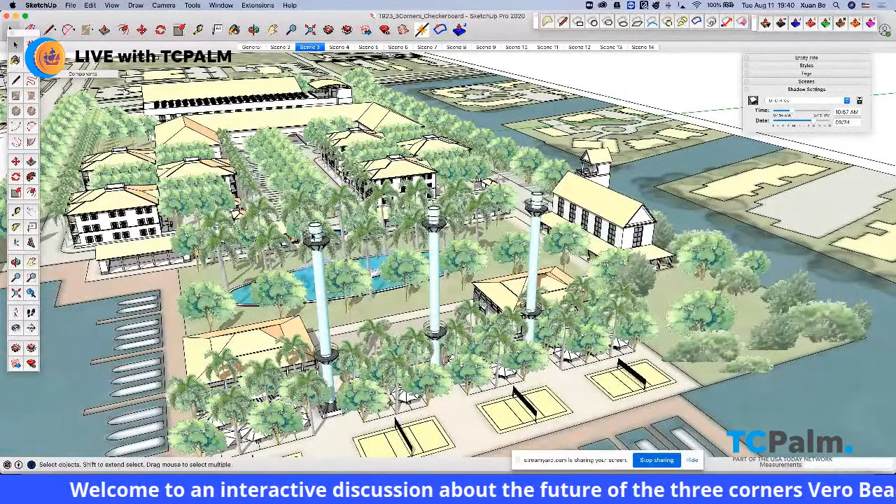When you look at them with their little platforms, they're really handsome, and what I love is their ability to hold light, specifically light that will light the tops of the trees, the courts, and the pool. The privilege is having light sources so distant that they don't have a hot spot, they actually bathe the whole thing in moonlight. That's the ideal, except people can't afford to do these things. But in any case, they're beautiful structures, and we treated them as sculpture.

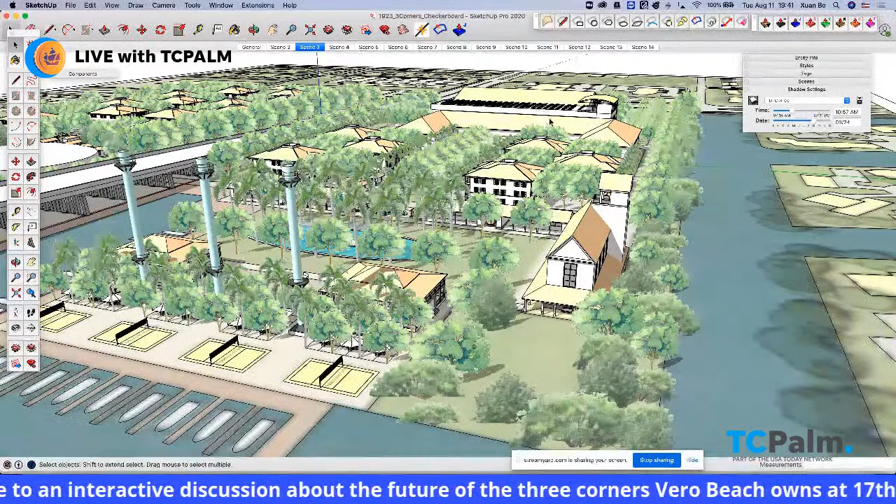They certainly make it unique to Vero Beach. I think in one of the charrettes, some ocean boaters commented that they use those lights as a guidepost. By the way, they're much lower than before, a lot lower now, because the base used to sit on top of the building. Now they're on the ground, so they're less tall, but you can still see them—60 feet lower.

We've got a question from Mike G.: Is your food truck concept similar to a ghost restaurant scene developing in DC?

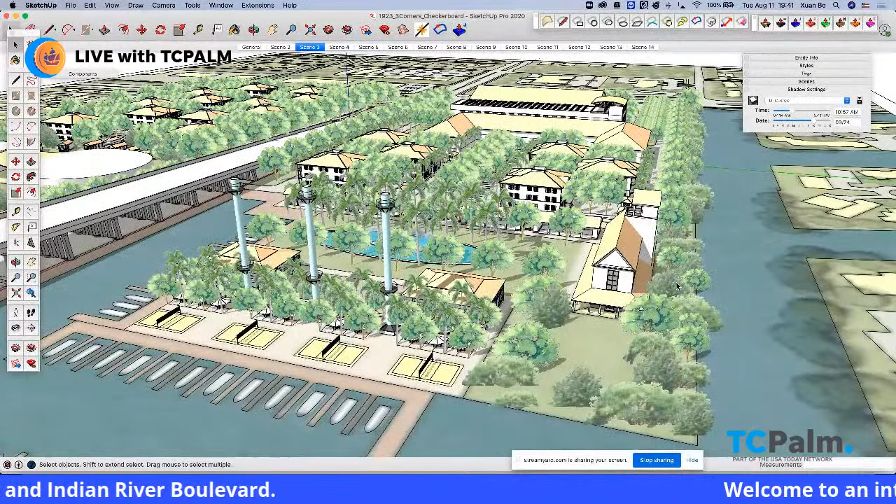It's similar to a place in Miami called The Yard, which has a tent that sells beer and drinks and has about a dozen food trucks very carefully curated to be excellent at what they do and to have variety. So what I had in mind was The Yard, and also a place called Wynwood that has permission to have them on the street.

The great thing is that the food trucks can change, and the word spreads—oh, this weekend there's an amazing food truck that came in from Tampa with Cuban sandwiches, or somebody says the famous Jamaican food truck is coming in this weekend. It keeps the place really active, it isn't just the same old menu. There's something very agile about food trucks.

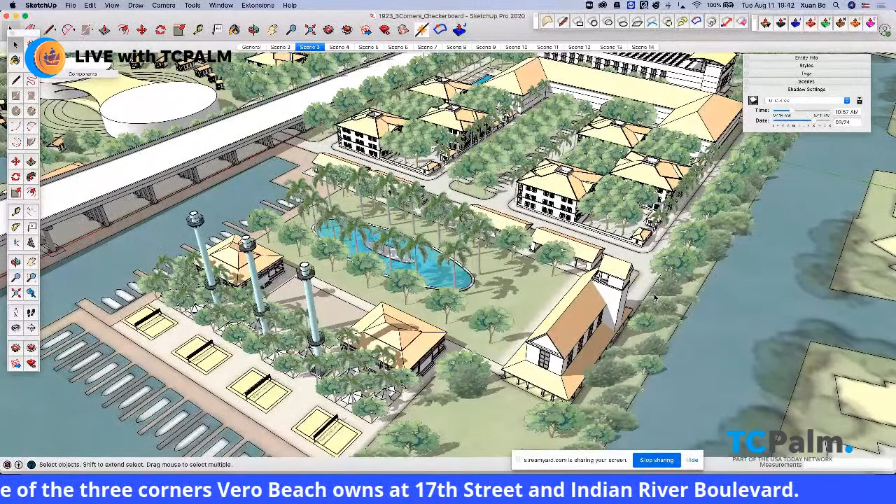The problem is they need a place where you can eat that's more dignified than hanging around a parking lot—that's where they fail. So by providing arcades and porches, that combination is wonderful. Food truck plus open porches.

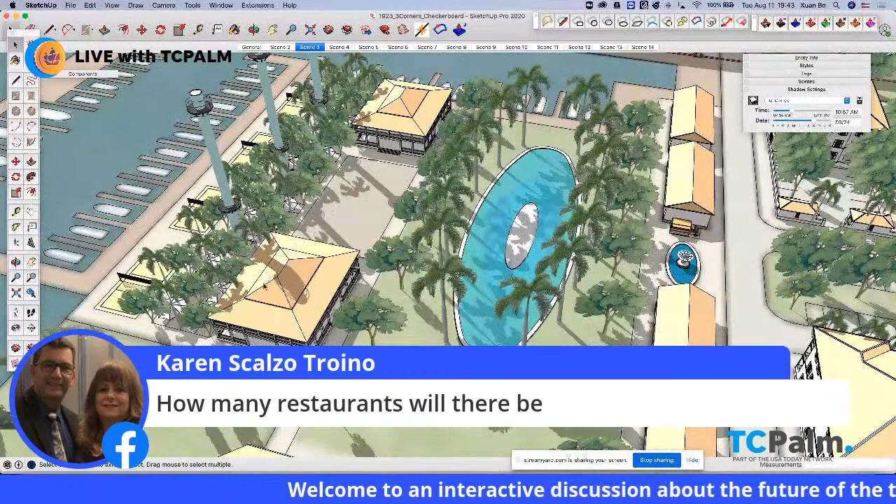We got another question from Karen: how many restaurants will there be? I think 2 or 3—well, there used to be 3, but I think that's really pushing it. The way I think of them is a more expensive restaurant for special events and people who want a big old steak for $30, and then an inexpensive one where a family can find grilled cheese sandwiches. So I think 2 is the minimum.

And then the open sheds, which you see over here in this line, would be very active on weekends with farmers markets and art fairs and so forth, because they're very programmable. They could also have, in between, a little food for those who really can't afford the big sit-down restaurant—that's quite an investment. Building one of these guys is a big investment, many millions of dollars, and so they have to charge for it.

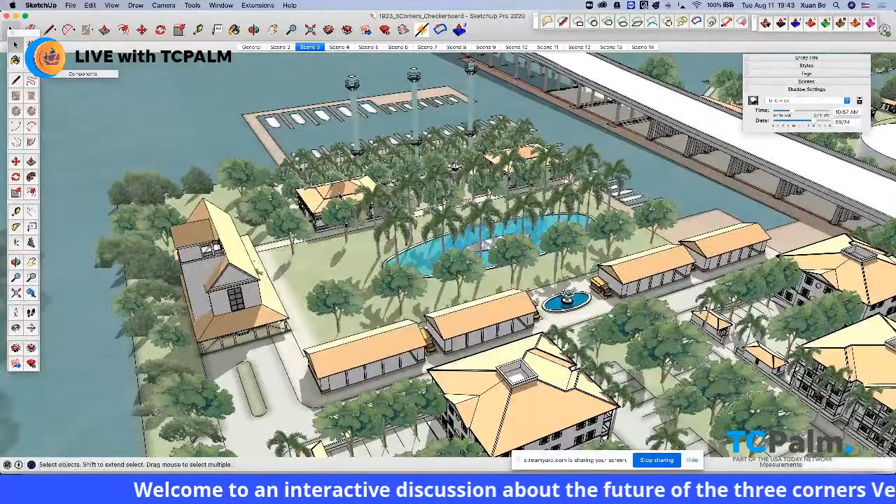It's the old brownie that costs $7—they have to pay for the building. With food trucks, you can get a brownie for $3, and it's just as good.

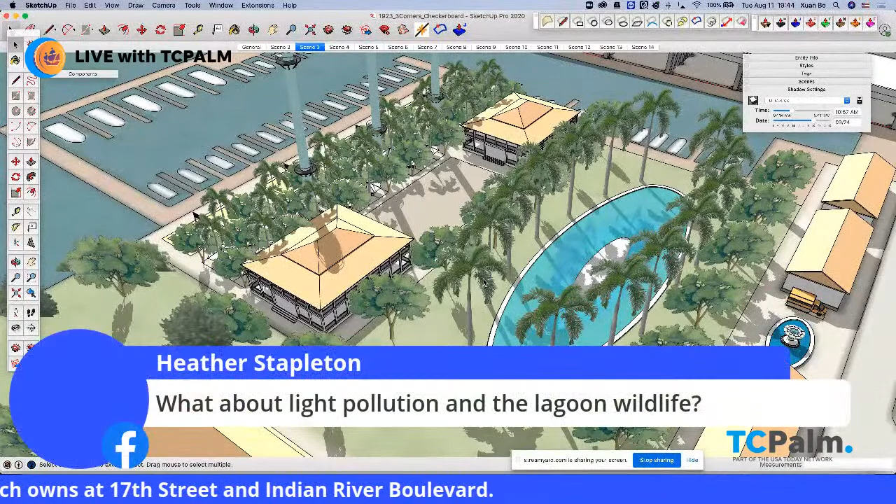Got a question here from Heather: what about light pollution and the lagoon wildlife? Well, I have to say there will be lights at night because humans require lights at night, and there's an incompatibility between human nightlife and dark sky—it's always been thus. But this is not something that we're doing up and down the whole lagoon.

It's just this one spot in the lagoon where humans can have this particular kind of foothold, but it's not up and down. There's a lot the creatures can move to. Some creatures do enjoy humans, humans are fun, but they can also move off to the darker parts, of which there are many.

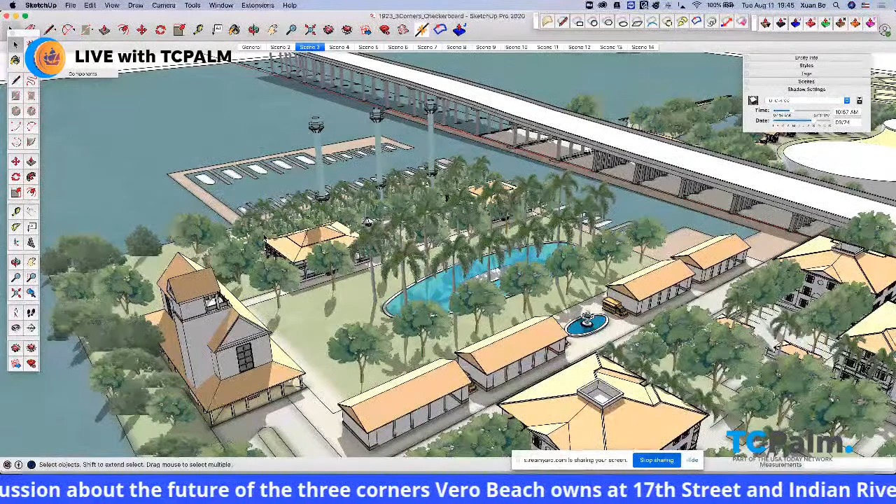Sure, but I'm not going to say that there isn't going to be lighting. You can't get humans to come out at night unless there's lighting. Exactly, okay.

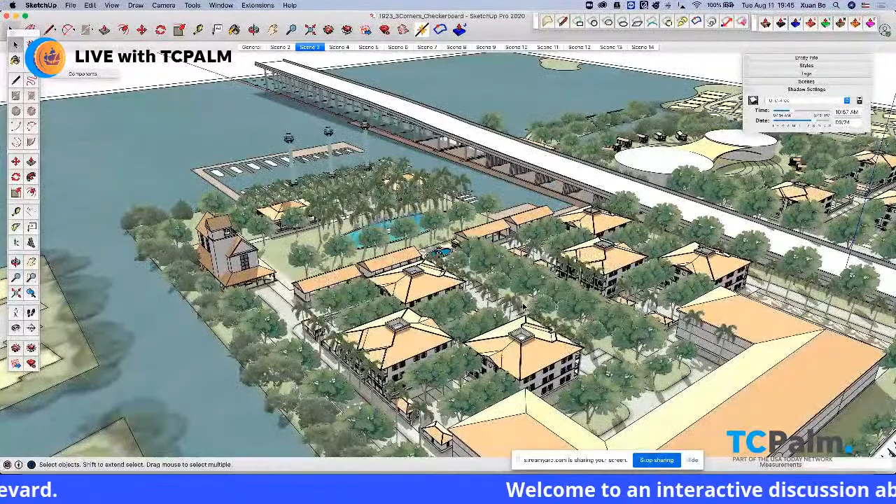Why is it stated that there's no stormwater projects necessary? What's the issue there? Because the whole thing has been handled. Maybe not in this one, okay? In this one that has more pavement, I haven't calculated it, but in the prior one, there's just so much pervious surface.

In the prior one, there's just so much open space, you see? Show me the plan. Yeah, it's just nothing but open space. It filters naturally, there's very little pavement. So that's why. Now in the new one with the apartment buildings, we have to recalculate, and we may have to do porous pavement and SUDS and all these things in this one. But the prior one, which is the one I was referring to, doesn't need that pond in the middle. We can have a pool.

Hey Monty and Jason, are porous surfaces allowed in the city? Or would you make it a special exception for this?

Well, the way the code's written now is that porous surface can be used for infrequent parking. But for the concept, we may have to look at some additional design criteria for something as unique as this.

You can also put it underneath the buildings, like if you look at our new towns up in the Panhandle, Alys and Rosemary, which are very dense - you ask yourself, where is the porous surface? It's actually underneath the buildings. The buildings are raised 3 feet, and it all goes underneath. There's sand beds there, and it goes down. It's just not shown, we don't brag about the porous surface, they're actually utilitarian.

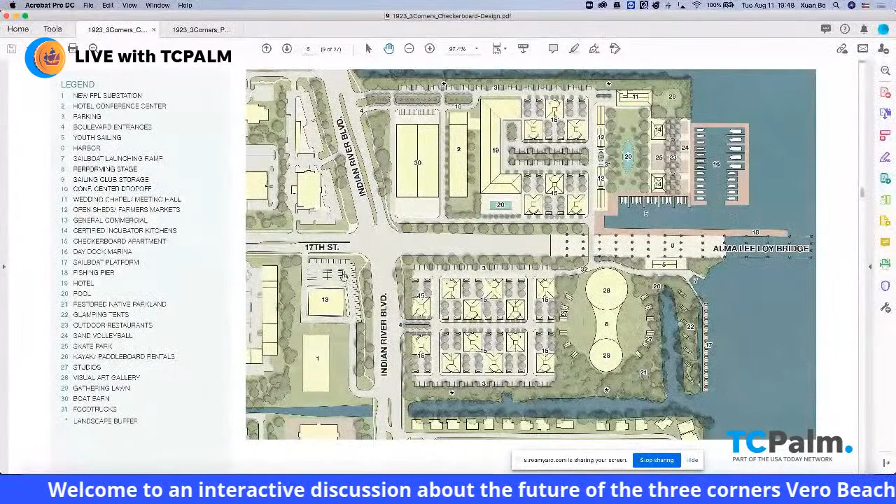But in the second plan, the one that has the apartments, these are parking lots, each of these are self-parking completely, okay, and there's parking at the edges. What I haven't done is made a big parking lot. And if there is not enough parking for event parking, at which point I think we should reserve lot 13 across the way for event parking. But I can certainly find more parking spaces by looking for them.

But a lot of this parking, if it's just for event parking, for the special event, you don't want to crowd up the whole site with parking just for what's called the peak event. Right.

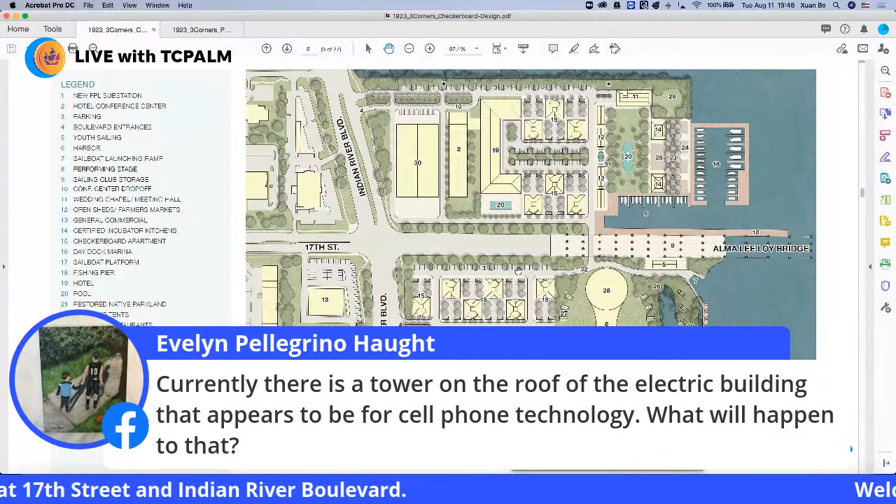That one's gone. There's an ugly one and 3 pretty ones, we kept the 3 pretty ones, got rid of the ugly one. Yeah Larry, the cell tower is coming down within the next year, and a new one's going to be constructed in the vicinity.

Okay, and what's the timetable on the substation being dismantled there? Well, as a matter of fact, they just are doing some testing to switch over to the new substation at the end of last week and the beginning of this week. Shortly, that should be all operational on the west side of the boulevard, and then we could look at dismantling coming up in the next couple months or before the end of the year for the substation and the current power plant. Okay, we might have another question here.

Question from Anastasia Hunnebrink: If we wanted to submit alternative concepts, what is the deadline and where do we submit them? Well, it depends how alternative it is.

The deadline officially ended quite a few weeks ago. We did this charrette and made the presentation in November. That was my contract, to do that. This is my own initiative, to do all this work without pay, essentially. So I do not feel I need to absorb a full plan. What I'd like is to hear your ideas, and as you know, I'm very flexible with ideas. I want to hear your ideas, but I don't want to see a drawing that I have to talk you out of - my contract's finished. But you can phone me personally and give me your ideas. I would certainly take that.